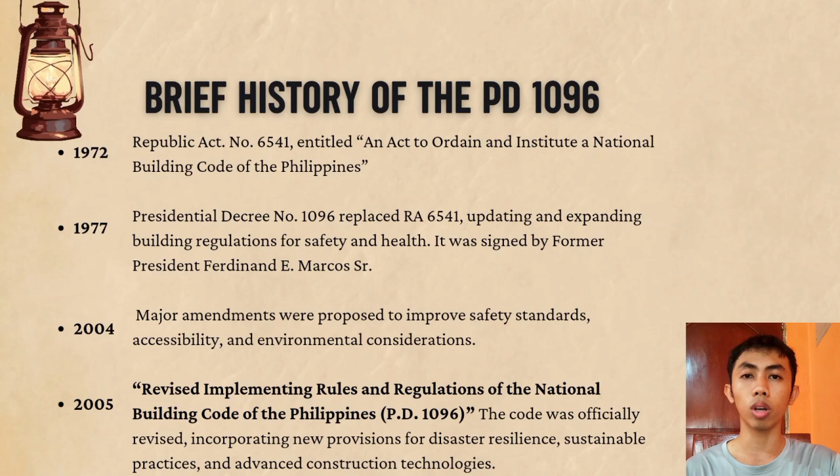Next, Presidential Decree number 1096, adopting a National Building Code of the Philippines, thereby revising Republic Act number 6541. It states that because of the economic development and physical development of the country, we need a building code that is more aligned with modern times.

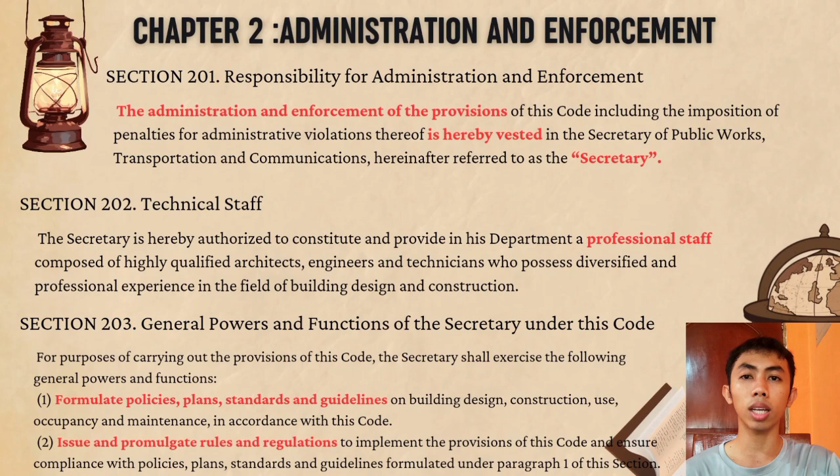Section 203, General powers and functions of the secretary under this code. Una, dapat mag-formulate siya ng policies, plans, standards, at guidelines in accordance with this code. Pangalawa, pagkatapos ma-formulate ang policies and guidelines, dapat mag-issue rin siya ng specific rules and regulations when implementing, para ma-ensure natin ang consistency ng guidelines.

Number 3, trabaho rin ng secretary na evaluate, review, o approve kung may nais baguhin sa code na ito. Nasa kamay niya kung sa tingin niya ay kailangan ng pagbabago o hindi mula sa code na ito. Number 4, siya rin dapat ang nag-seset ng fees tulad ng permit at inspection.

Section 204, professional and technical assistance. Sinasabi dito na ang technical staff na binuo ng secretary ay shall provide different services including professional and technical service, at testing laboratories and facilities.

Section 205, building official. Sila ang in charge ng pag-implement ng rules. Kung walang building official sa lugar, kailangan na ang secretary ang mag-appoint ng current engineer sa mismong municipality na wala pang building official. Ang napiling tao ay mag-i-stay doon sa lugar hanggang may maipalit na building official doon.

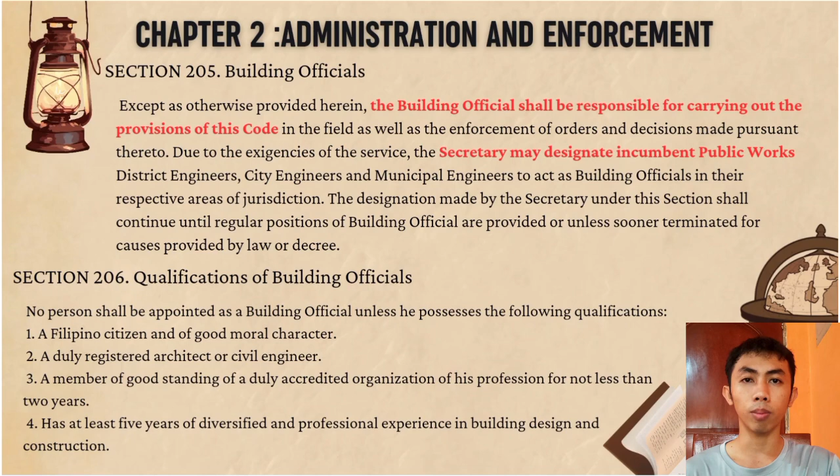Section 206. Sino ba ang maaaring maging building official? Una, dapat Filipino with good moral character, kailangang malinis ang pangalan mo. Pangalawa, dapat registered civil engineer or architect ka, kaya itong mga profession lang pala ang pwedeng maging building official. Pangatlo, dapat member ka ng organized professional organization tulad ng PICE o United Architects of the Philippines for at least 2 years. At lastly, dapat may 5 years experience sa iyong profession.

Section 207. Bilang building official, may mga duties tulad ng pagiging responsable sa enforcement of the code and implementing rules and regulations. Sa kanya rin galing ang mga building permits. Trabaho rin niya na mag-inspect ng existing buildings sa kanilang respective area, at may kapangyarihan din silang magpatigil ng construction kung hindi ito naaayon sa PD 1096.

Section 208. Building officials shall keep a permanent record and accurate account of all fees and other charges. Maaari niyang panatilihin ang 20% para sa kanyang opisina, habang ang 80% ay dapat niyang i-remit sa municipal treasury, na ibibigay naman ng municipal treasurer sa general fund ng either province o ng mismong municipality.

Sabi nga lahat ng bagay may exception. Section 209 ay nagsasaad na ang lahat ng public buildings tulad ng public school at hospital, pati ang traditional indigenous family dwelling, ay exempted sa pagbabayad ng building permit. Ni-specify rin na ang mga indigenous people should be constructed using bamboo, nipa, lumber, at dapat hindi lalampas ng 15,000 pesos ang gastos nila sa pagpapatayo ng bahay na ito.

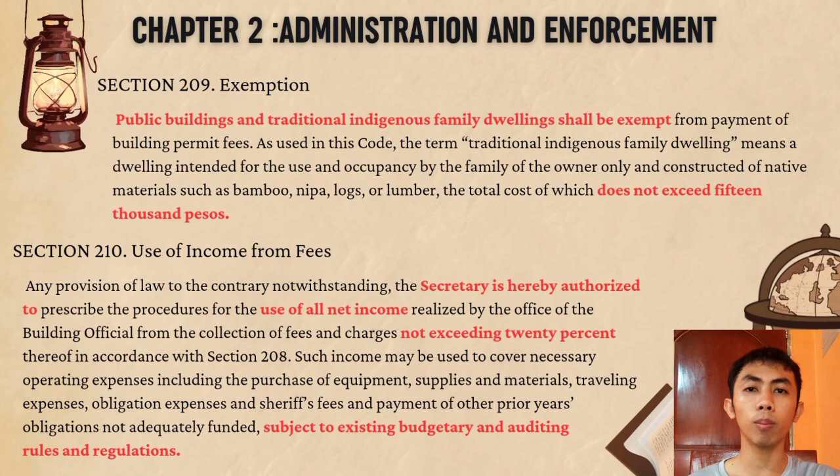Section 210. Ang na-collect na makita from the Office of Building Official ay maaaring kunin ng Secretary ang 20% dito para mapalitan o mabayaran ang mga expenses niya tulad ng operating and travel expenses, facilities and equipment, at others. Ang mga expenses na ito ay dapat comply with budgetary and auditing rules.

Section 211. Gaya ng nasabi kanina, isa sa duties ng Secretary ay mag-formulate at mag-implement ng rules and regulations. Nag-take effect lang daw ito after their publication once a week for 3 consecutive weeks sa newspaper.

Section 212. Kahit na ang secretary ang magde-decide ng bayad kung may nalabag sa rules, hindi dapat tumaas ng 10,000 pesos ang fine dito. Next, Section 213, o penal provision.

So ano ba muna yung pinagkaiba nito sa administrative fines? So when we say administrative fines, tumutukoy ito sa action, process, or responsibility ng isang tao as part of activities or the management. So it does not directly affect the public people. Some of the administrative fines include failure to submit documents on time, or hindi pag-submit ng records or report na hinihingi ni building official. While penal provision is a violation na directly affected ang people or the safety of the buildings.

For example, paggamit ng mga substandard na material, hindi paglalagay ng maayos na sprinkler system and fire exits, o pag-demolish na wala namang mga permit.

Kung nangyari ito, maaaring magbayad ng at most 20,000 yung violators o makulong na hindi higit sa 2 taon, or both - pwede siyang magbayad at makukulong. Then kapag foreign yung nag-violate, pagbabayarin daw siya o ikukulong siya, then after mapagbayaran yun, saka naman siya i-deport.

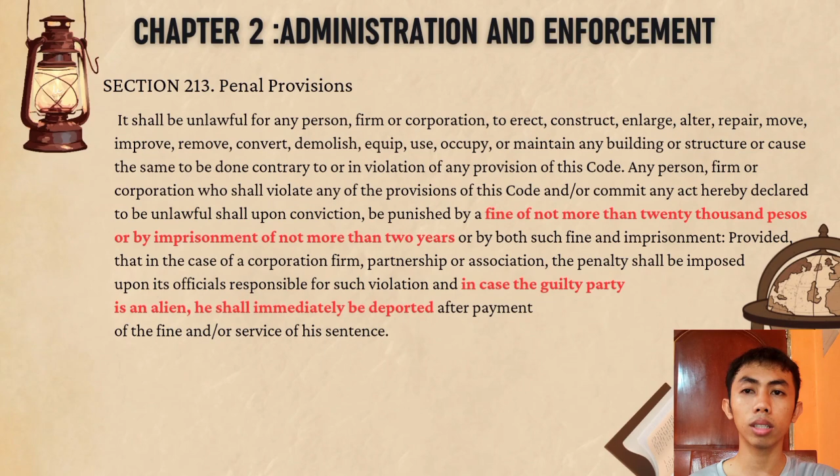Next, Section 214. Dito dinidefine lang kung ano yung mga tinuturing na dangerous building, tulad ng building na di maayos o delikado yung mga ginamit na material, mga building na malapit sa fire hazard, o mga building na nagdudulot ng pollution sa environment, tulad ng factory na mausok o naglalabas ng chemical waste na nakaka-apekto sa health and safety ng public.

Next, Section 215, Abatement of Dangerous Building. Sinasabi dito na kung may dangerous o ruinous building, magbababa ng order yung building official sa lugar, na either ipapa-repair, i-abandon, o ipapa-demolish, depende kung gaano kalala yung sitwasyon ng lugar.

Section 216, Other Remedies. Sinasabi dito na rights and remedies sa PD 1096 is not exclusive sa code na ito, ibig sabihin, coexist ito with other laws. Halimbawa, kapag may nagtayo sa inyo ng building at nalaman mong walang permit o hindi maayos yung pagkagawa, maaaring ikaw mismo ang magsumbong sa otoridad dahil nakataya ang kapakanan ninyo dito. Ibig sabihin, hindi lang siya under ng national code, kundi naapektuhan din dito yung human rights mo.

So dumako naman tayo sa Chapter 3, which is Permits and Inspection. Ano ba nilalaman nito? Una, Section 301, Building Permit. Specific na sinabi dito na no person shall erect, construct, alter, or demolish without obtaining building permit from the building official from that place.

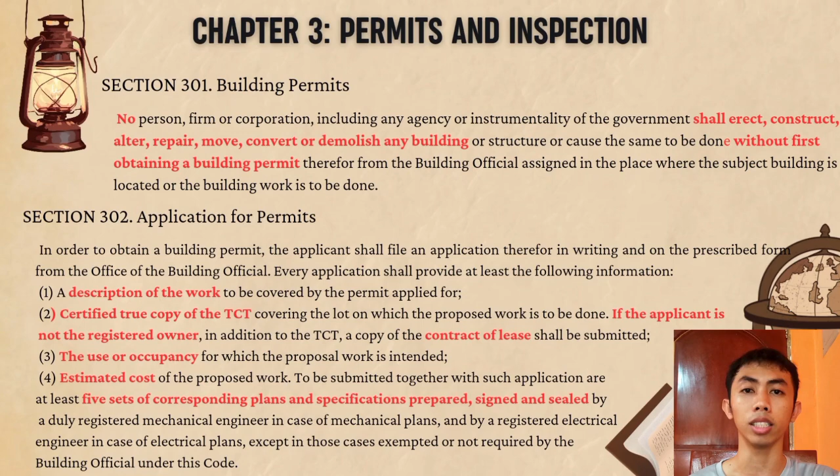Next, Section 303, Processing of Building Permit. Sinasabi dito na pagmamalakad ng building permit is responsibility ni building official. Siya yung nag-inspect kung approved ba yung mga requirements na pinasa mo o kung may error ba doon, kasi kung may error, hindi ka maibibigyan nun - ibig sabihin, bibigyan ka ng pagkakataon na ayusin yon.

Next, Section 304. Once na-satisfy na yung mga requirements at wala namang na-violate na code, maaari na tayong bigyan ng permit. Once na-settled na lahat at nakapagbayad na si permittee, pwede nang ibigay sa kanya yung permit at pwede na siyang mag-construct. Binanggit din dito na kung ano lang yung in-issue doon, dapat yun lang yung gawin.

Kung first floor lang naman yung binigay na plan, so dapat na makita is first floor lang. Hindi ka dapat magdagdag ng iba pang floor kasi violation na kagad yun sa code. Pwede na yun ipatigil kasi wala naman yun sa original mong binigay.

Next, Section 305. Sa section na ito, nakapaloob dito yung limitation and condition once na nakuha natin yung building permit. Sinasabi rito na ang permit does not allow you to violate the code. Yung permit, inaalaw lang tayo para makapagtayo ng bahay, hindi tayo inaalaw para ma-exempt sa batas.

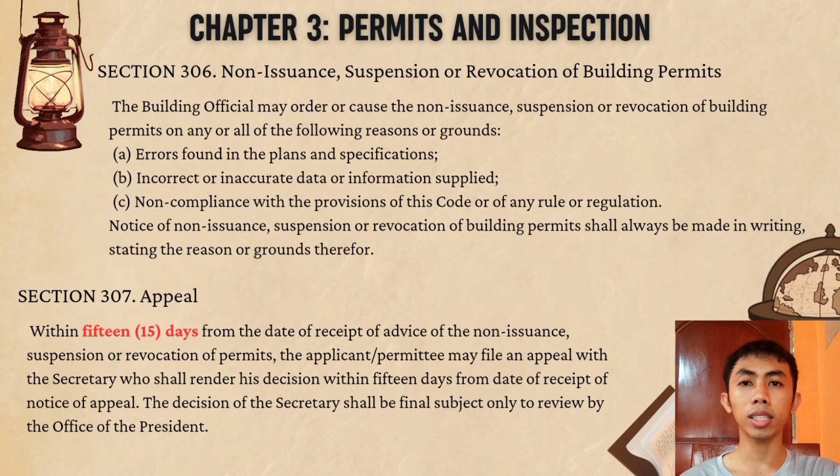Next, Section 307, Appeal. Kung ever na hindi na-approve yung issuance ng permit, si permittee ay pwede mag-appeal within 15 days sa secretary, after may ibigay na notice. Dito, re-reviewin daw ni secretary yon, siya magde-decide kung okay ba o hindi talaga okay yung project na ipapagawa.

Section 308, Inspection and Supervision of Work. Sinasabi dito na dapat may licensed civil engineer o architect na mag-inspect doon sa nasabing building na ipapagawa para malaman kung sumusunod ba sila sa building code. Maaari din kung sino yung engineer o architect na nag-design ng bahay, siya din daw yung mag-inspect dun sa building. At kung ibang professional naman yung kinuha, may karapatan pa rin daw yung engineer o architect na nag-design ng bahay na mag-check and inspect kung naka-align pa rin ba yung design niya at pasok pa rin ba sa safety standard yung project.

Siyempre, may responsibility pa rin naman si engineer na nag-design kasi andun pa rin naman yung pirma niya.

Dapat meron din daw logbook sa construction site, na nakalagay lahat dito yung mga kaganapan doon sa site, tulad ng mga ginawang lab testing, ano ba yung progress na nangyari sa araw na yun, yung weather, at iba pa. After finishing the construction, yung inspector o supervisor ay nire-require na ipasa yung logbook to the building official, at kailangan ding mag-submit ng certificate of completion na nagpapatunay na tapos na yung building at walang na-violate na code habang ginagawa hanggang matapos yung building.

Section 309, Certificate of Occupancy. Sinasabi dito na hanggang wala daw Certificate of Occupancy, hindi daw pwedeng magamit yung building. So after mag-submit ng Certificate of Completion and final inspection of the building, maaari nang mag-issue si building official ng Certificate of Occupancy kung maayos naman daw yung lahat.

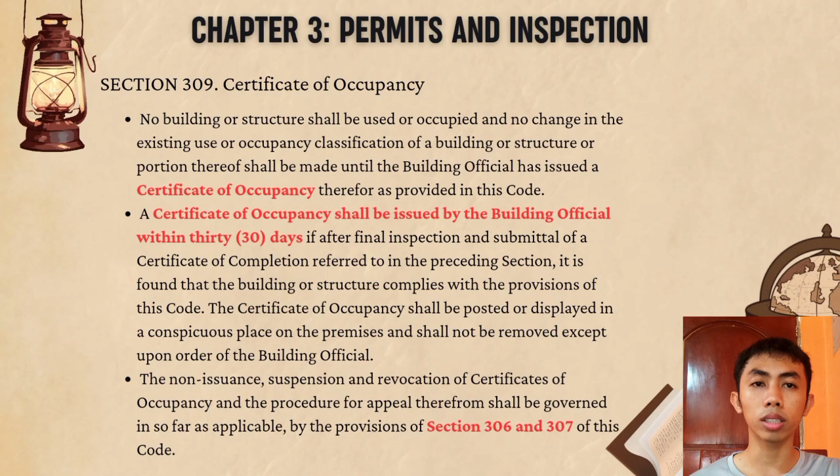Ngayon, dumako naman tayo sa Chapter 4, which is types of construction. So there are types of construction according to Section 401. Type 1, building shall be of wood construction, dapat gawa sa kahoy. Type 2, it is also wood construction with protective fire resistance materials na kayang tumagal ng 1 hour sa sunog.

Kapag gumamit naman daw ng hollow block and semento, pasok naman siya sa Type 3, provided na yung ginagamit na pambubong o support ay gawa pa rin sa kahoy. Type 4, sinasabi rito na yung building material na ginamit ay steel and concrete na, so it should be incombustible o hindi dapat siya nasusunog.

Except the permanent non-bearing partition may use fire retardant wood. Type 5, building shall be fire resistive, so lahat daw dapat ng material ay incombustible na, wala nang dapat kahoy na ginagamit.

Section 402, Changes in Types. So, if the owner wants to change the type of building, he must propose to the building official showing that it is less hazardous than the existing one.

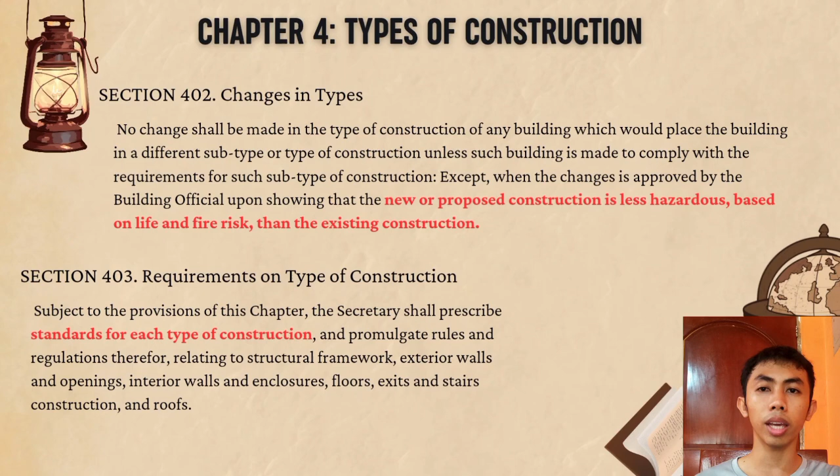Chapter 5, Requirements for Fire Zone. Section 501, Fire Zone Defined. As stated, fire zones are areas within which only certain types of buildings are permitted to be constructed, based on their use or occupancy, type of construction, and resistance to fire.

Section 502, Buildings located in more than one fire zone. If a building is located in more than one fire zone, covering at least 1/3 of the floor area of the building, the building is considered to be in the highly restrictive fire zone, which has stricter standards in terms of fire resistance.

Section 503, Moved Building. Any building or structure moved within or into a fire zone shall be made to comply with all the requirements for buildings in the fire zone. So if we move a building into a fire zone, it must meet the safety standards required in that fire zone.

Section 504. Temporary buildings such as sheds or barracks are allowed to be built within the fire zone with a special permit for a period of time. When the validity of the permit ends, they are required to demolish these temporary buildings.

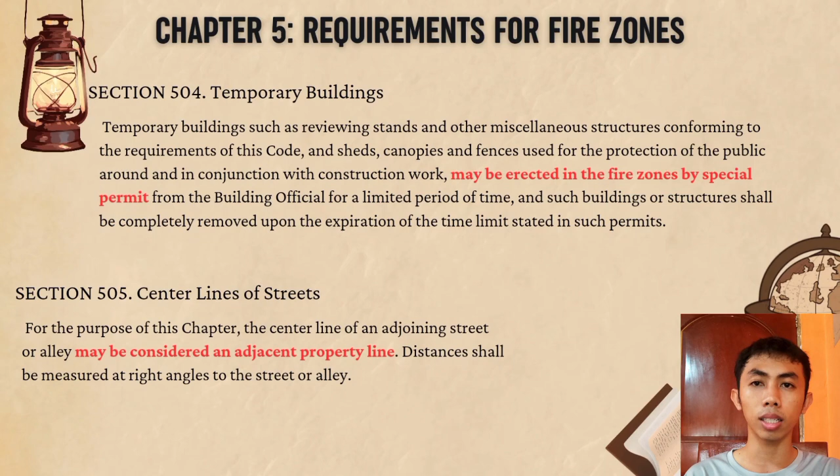Section 505, Center Lines of Streets. The white or yellow line in the middle of the road is called the center line. If the building official says a 6-meter setback is required, the center line can be used as reference. This is often applicable in markets or streets when constructing a new building or infrastructure.

Section 506, Restriction on Existing Buildings. If there are buildings that did not follow the requirements and did not meet the safety standards, they are not allowed to have alterations or changes, except: A, if the building is being demolished, since it is not safe anyway, it is allowed to be demolished.

B, if the case is to move the building to a safer place. C, they are given 1 year to make minor changes, but the costs should not exceed 20% of the value of the building, and they should not add combustible materials like wood that would add more hazard.

D, in case there is an additional building, it must be separated by firewalls from the existing building. E, if there is natural phenomena like an earthquake or typhoon, they are only allowed to repair the building.

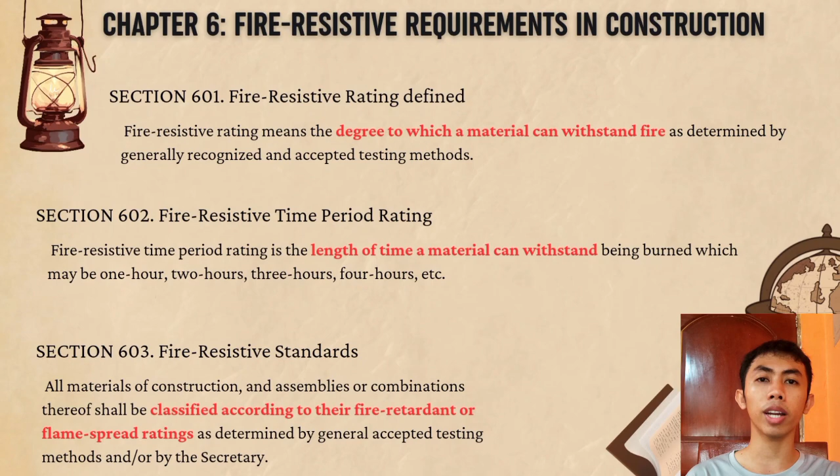Section 603, Fire-Resistive Standards. This states that materials should be classified according to their fire retardant properties - from the word retard, meaning to delay - or their fire spreading characteristics.

Section 604, Fire-Resistive Regulations. Like the other chapters, the secretary is required to promulgate rules and regulations for testing construction materials, from woods, windows, to ceilings, to determine which materials are appropriate to meet the safety standard.

Chapter 7, Classification and General Requirements of All Buildings by Use or Occupancy. Section 701, Occupancy Classified. We have 10 classifications according to Section 701.

First, residential dwelling. It should accommodate no more than 10 people. Group B is when it exceeds 10 residents and has multiple rooms or dwellings, classified as Group B, such as apartments and hotels.

Next, Group C includes schools and recreation, such as libraries or gyms, where we work out. Then Group D is institutional.

It is divided into 3. First, Division 1 includes mental hospitals, jails, rehab, or any building where people are restrained or confined. In Division 2 are nurseries for babies and hospitals that can accommodate more than 5 people. In Division 3, it's mostly the same.

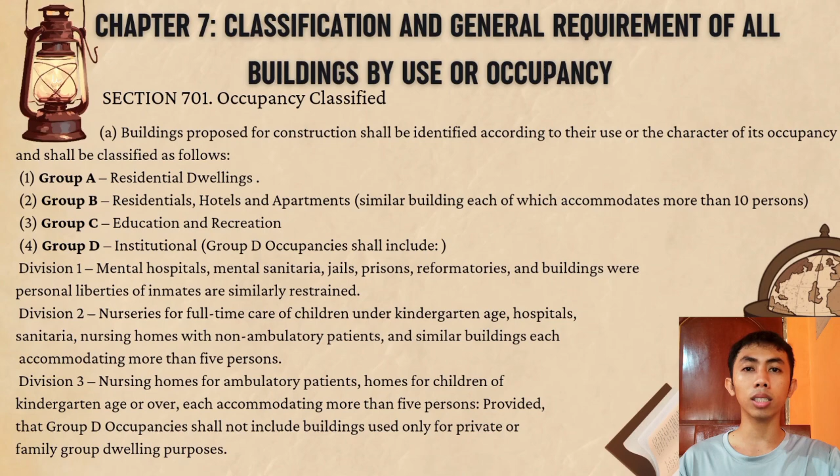Next is Group E, Business and Mercantile. Like Group D, this is divided into three. First, including gasoline stations, car dealers, and storage garages that don't use open flames and welding in the area. Division 2 includes retail shops, small restaurants, and police and fire stations.

Division 3 is particular to large parking spaces or garages, like hangars or garages for aircrafts. Next, Group F or Industrial, which includes different kinds of plants. Group G is storage and hazardous.

This has 5 divisions. The first division is storage for highly flammable materials like gasoline. Division 2 includes storage for dry cleaning plants and paint, which is also flammable. Division 3 is woodworking and factories.

This includes those who cut wood, make wood sculptures, and sell coco lumber, and any factory that produces wood dust that is prone to fire. Division 4 is repair garage, like auto shops. And lastly, Division 5, which is specific to aircraft repair hangars.

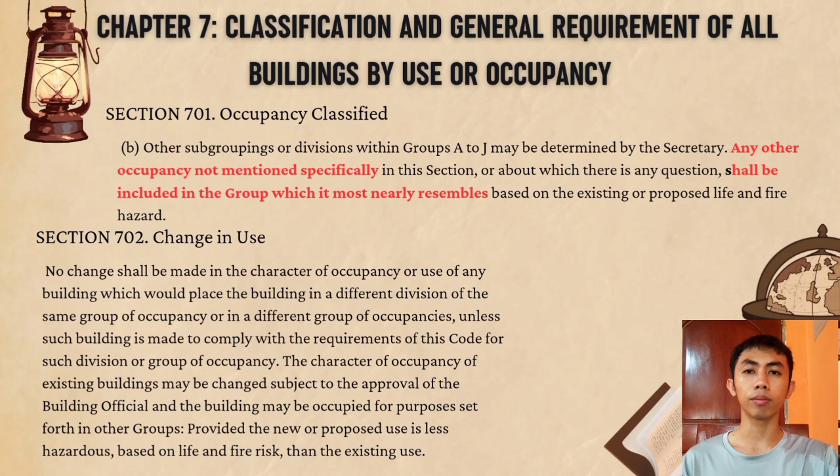If this is the case, it is approved as long as each type of building meets the requirements of safety standards.

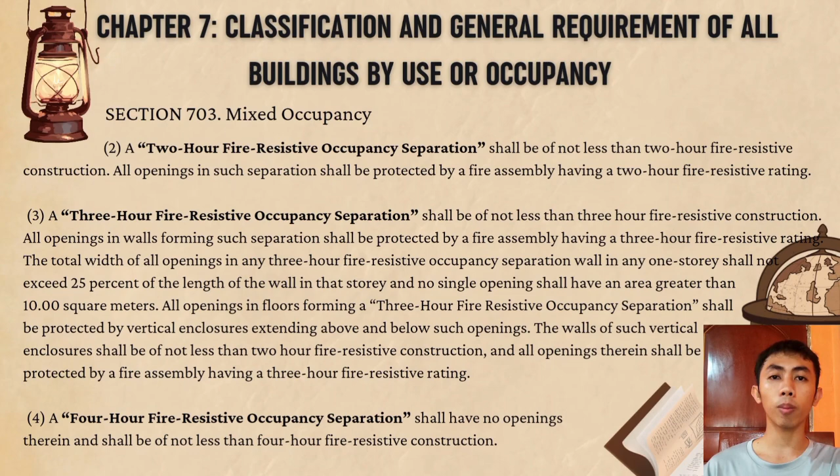3-hour fire resistive occupancy separation. Naka-indicate dito na dapat yung opening is not greater than 25% of the length of the wall, and hindi daw lalaki ng 10 square meters yung openings. Pagdating naman sa 4-hour fire resistive occupancy, sinasabi daw dito na dapat yung building ay walang opening, and kaya niya daw mag-resist ng 4 hours resistive construction.

Section 704, location of the property. Sinasabi rito na if there are more than one building in the same property, ang una nating assumption ay separated sila. Pero kapag yung combined floor area ng dalawang building is within a limit, kino-consider natin siya na isa lang, provided na ina-ensure nito yung safety ng lugar.

Section 705, allowable floor areas. Sinasabi dito na ang allowable floor area ng isang building ay nakadepende sa type ng building, at ang magko-proclaim nito ay ang secretary ulit ng DPWH. Sinasabi rin dito na para sa separate buildings within a property, magkahiwalay dapat ang pagsukat ng floor area.

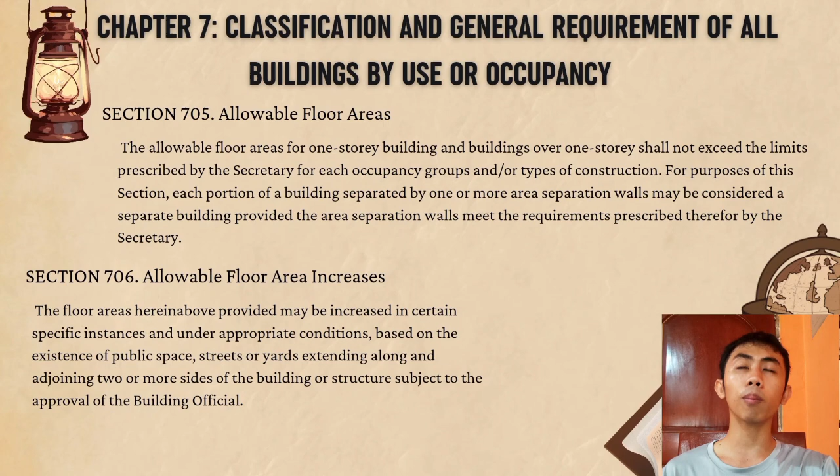Section 706, allowable floor area increase. Binanggit rito na sa mga specific instances, inaallow daw na ipa-extend yung building, provided na inapprove siya ng building official.

Section 707, maximum height of building. Ang maximum height ng building from floor to ceiling ay dapat hindi lalagpas ng 3 meters para sa building na for dwelling, yung mga tinitirhan ng mga tao. Para naman sa mga building na hindi tinitirhan ng mga tao, pwede daw ito hanggang 6 meters, like tower.

Section 708, minimum requirements for Group A dwelling. A, dwelling location and lot occupancy. Sinasabi dito na kung yung building mo ay located sa corner ng street, pwede mo i-occupy ang 90% mismo ng lote. And kung nasa gitna naman or napapalibutan siya ng ibang property, pwede mo i-occupy ang 80% ng lote mismo, provided na mayroong 2-meter setback from the property line.

B, light and ventilation. Dito may discuss mamaya sa Chapter 8 which is light and ventilation. Sanitation - sinasabi dito na dapat mayroon daw at least one toilet, and also washing and drainage facilities.

Foundation. Sinasabi dito na dapat yung pundasyon ng building ay at least 250 mm thick and dapat below 600 mm from the ground.

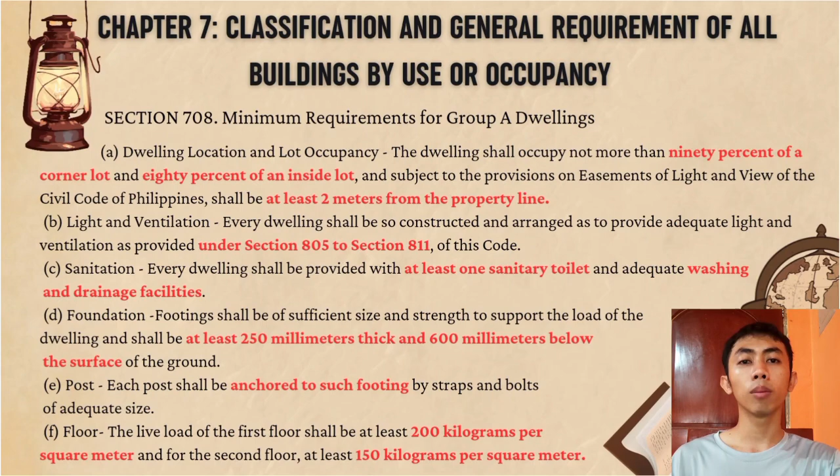Roof. Para naman sa roof, dapat daw kaya niyang i-withstand ang wind load na 120 kg per square meter. Stairs - stairs shall be at least 750 mm in width, 200 mm in rise o yung taas, and a minimum run of 200 mm din.

I, entrance and exit. There shall be at least one entrance and another one for exit. J, electrical requirements - all electrical installations shall conform to the requirements of the Philippine Electrical Code. K, mechanical requirements - same lang din, dapat naka-align siya sa Philippine Mechanical Engineering Code.

Section 709, requirements for other groups occupancies. Sinasabi lang naman dito na ang rules and regulations of minimum requirements of other occupancies aside from dwellings ay manggagaling mismo sa Secretary ng DPWH.

Chapter 8, Light and Ventilation. Section 801, General Requirements of Light and Ventilation - subject to the provisions of the Civil Code of the Philippines on easements of light and view, and to the provisions of this part of the code. Every building shall be designed, constructed, and equipped to provide adequate light and ventilation. All buildings shall face a street or public alley or a private street which has been duly approved.

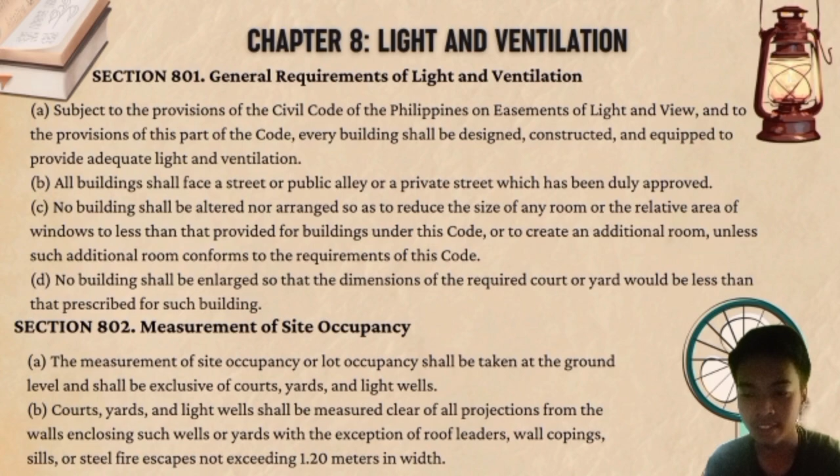Section 802. Measurement of site occupancy. The measurement of site occupancy or lot occupancy shall be taken at the ground level and shall be exclusive of courts, yards, and light wells. Courts, yards, and light wells shall be measured clear of all projections from the walls enclosing such wells or yards, with the exception of roof leaders, wall coping, sills, or steel fire escapes not exceeding 1.2 meters in width.

Section 803. Percentage of site occupancy. Maximum site occupancy shall be governed by the use, type of construction, and height of the building, and the use, area, nature, and location of the site, and subject to the provisions of the local zoning requirements and in accordance with the rules and regulations promulgated by the Secretary.

Section 804. Size and dimensions of courts. Minimum size of courts and their least dimensions shall be governed by the use, type of construction, and height of the building, as provided in the rules and regulations promulgated by the Secretary, provided that the minimum horizontal dimension of a court shall be not less than 2 meters. All inner courts shall be connected to a street or yard, either by a passageway with a minimum width of 1.2 meters or by a door through a room or rooms.

Section 805. Ceiling heights. Habitable rooms provided with artificial ventilation shall have a ceiling height not less than 2.4 meters, measured from the floor to the ceiling, provided that for buildings of more than one story, the minimum ceiling height for the first story shall be 2.7 meters and for the second story 2.4 meters. Succeeding stories shall have an unobstructed typical headroom clearance of not less than 2.1 meters above the finished floor.

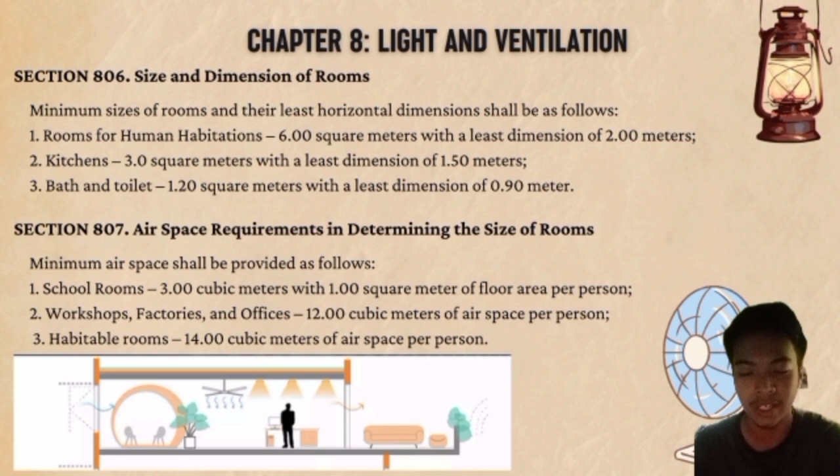Section 808. Window openings. Every room intended for any use not provided with an artificial ventilation system as specified in this code shall be provided with a window or windows with a total free area of openings equal to at least 10% of the floor area of the room, and such window shall open directly to a court, yard, public street or alley, or open watercourse.

Section 809. Vent shafts. Ventilation or vent shafts shall have a horizontal cross-sectional area of not less than 0.1 square meter for every meter of height of shaft, but in no case shall the area be less than 1 square meter. No vent shaft shall have its least dimension less than 600 millimeters. Unless open to the outer air at the top of its full area, the vent shaft shall be covered by a skylight having a net free area of fixed louver openings equal to the maximum required shaft area.

Air ducts shall open to a street or court by a horizontal duct or intake at a point below the lowest window opening. Such duct or intake shall have a minimum unobstructed cross-sectional area of not less than 0.3 square meter with a minimum dimension of 300 millimeters. The openings to the duct or intake shall not be less than 300 millimeters above the bottom of the shaft and the street surface or level of the court at the respective ends of the duct or intake.

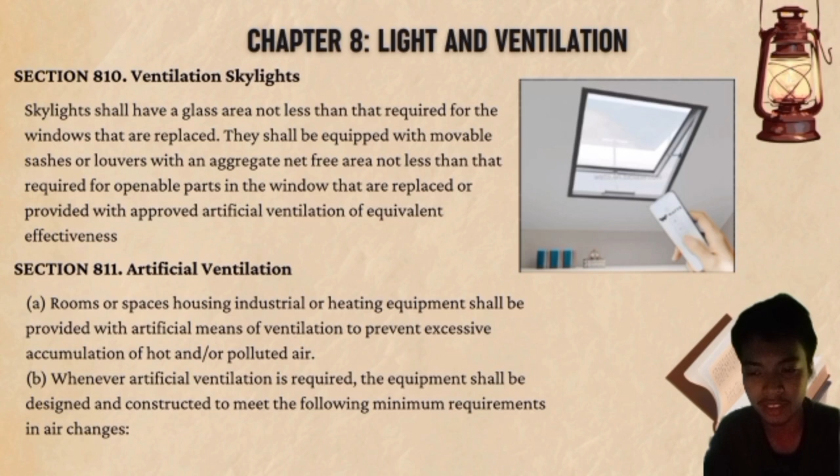Whenever artificial ventilation is required, the equipment shall be designed and constructed to meet minimum requirements in air changes. For rooms entirely above grade used for office, clerical, or administrative purposes, or as stores, sales rooms, restaurants, markets, factories, workshops, or machinery rooms, not less than 3 changes of air per hour shall be provided.

For rooms entirely above grade and used as bakeries, hotel or restaurant kitchens, laundries other than accessories to dwellings, and boiler rooms, not less than 10 changes of air per hour shall be provided.

For auditoriums and other rooms used for assembly purposes with seats or other accommodations, not less than 0.3 cubic meter of air per minute shall be supplied for each person.

For wards and dormitories of institutional buildings, not less than 0.45 cubic meter of air per minute shall be supplied for each person accommodated. For other rooms or spaces not specifically covered under this section, applicable provisions of the Philippine Mechanical Engineering Code shall be followed.

Chapter 9, Sanitation. Section 901, General Requirements. Subject to the provisions of Book 2 of the Civil Code of the Philippines on property, ownership, and its modification, all buildings hereafter erected, altered, remodeled, relocated, or repaired for human habitation shall

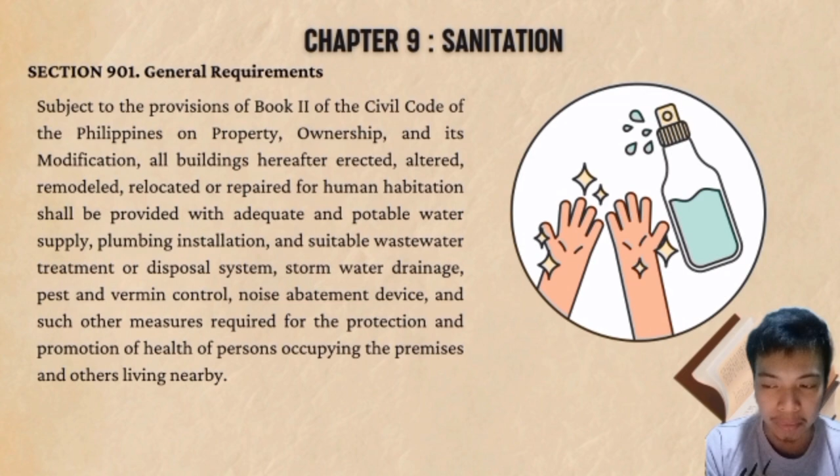be provided with adequate and potable water supply, plumbing installation, and suitable wastewater treatment or disposal system, stormwater drainage, pest and vermin control, noise abatement devices, and such other measures required for the protection and promotion of health of persons occupying the premises and others living nearby.

Section 902, Water Supply System. Whenever available, the potable water requirements for a building used for human habitation shall be supplied from existing municipal or city waterworks system. The quality of drinking water from meteoric, surface, or underground sources shall conform to the criteria set in the latest approved national standards for drinking water.

The design, construction, and operation of deep wells for abstraction of groundwater shall be subject to the provisions of the Water Code of the Philippines. The design, construction, and operation of independent waterworks systems, private housing subdivisions, or industrial estates shall be governed by existing laws relating to local waterworks systems.

Lastly, the water piping installations inside the buildings and premises shall conform to the provisions of the National Plumbing Code of the Philippines. Section 903, Wastewater Disposal System.

Sanitary sewage from buildings and neutralized or pre-treated industrial wastewater shall be discharged directly into the nearest street sanitary sewer main of existing municipal or city sanitary sewerage system, in accordance with the criteria set by the Code on Sanitation and the National Pollution Control Commission.

All buildings located in areas where there are no available sanitary sewerage systems shall dispose their sewage via Imhoff or septic tank and subsurface absorption field. Lastly, sanitary and industrial plumbing installations inside buildings and premises shall conform to the provisions of the National Plumbing Code.

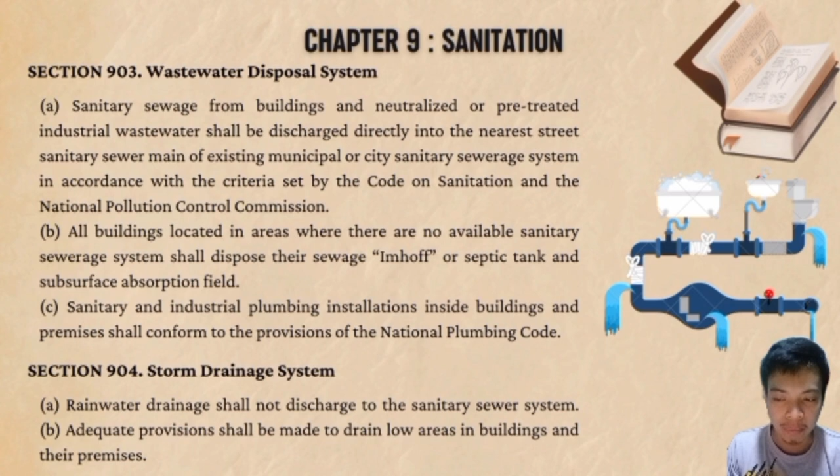Section 904, Storm Drainage System. Rainwater drainage shall not discharge to the sanitary sewer system. Adequate provision shall be made to drain low areas in buildings and their premises.

Section 905, Pest and Vermin Control. All buildings with hollow and/or wood construction shall be provided with rat-proofing. Garbage bins and receptacles shall be provided with ready means for cleaning and with positive protection against entry of pests and vermin. Dining rooms for public use without artificial ventilation shall be properly screened.

Section 906, Noise Pollution Control. Industrial establishments shall be provided with positive noise abatement devices to tone down the noise level of equipment and machineries to acceptable limits set down by the Department of Labor and the National Pollution Control Commission.

Section 907, Pipe Materials. All pipe materials to be used in buildings shall conform to the standard specifications of the Philippine Standard Council. Chapter 10.

Building Projection over Public Streets. Section 1001, General Requirements. No part of any building or structure or any of its appendages shall project beyond the property line of the building site, except as provided in this code. The projection of any structure or appendage over a public property shall be the distance measured horizontally from the property line to the uttermost point of the projection.

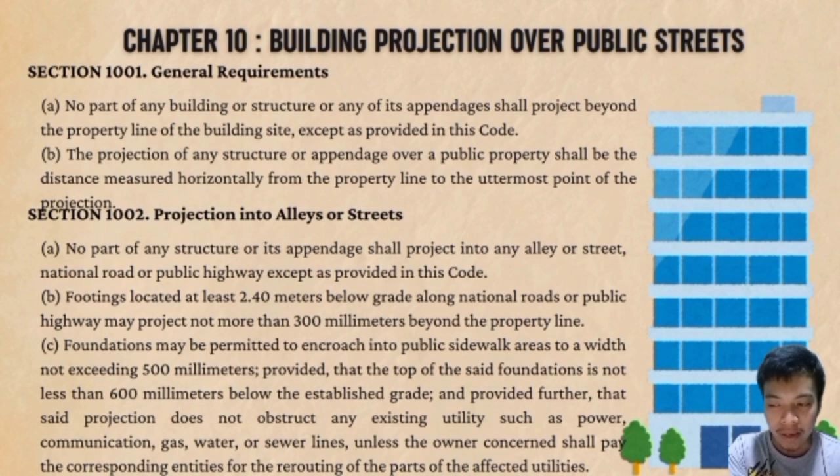Footings located at least 2.4 meters below grade along national roads or public highways may project not more than 300 millimeters beyond the property line. Foundations may be permitted to encroach into public sidewalk areas to a width not exceeding 500 millimeters, provided that the top of the said foundation is not less than 600 millimeters below the established grade, and provided further that the projection does not obstruct any existing utility such as power, communication, gas, water, or sewer lines, unless the owner concerned shall pay the corresponding entities for the rerouting of the affected utilities.

Section 1003. Projection of balconies and appendages over streets. The extent of any projection over an alley or street shall be uniform within a block and shall conform to the limitations set forth. The clearance between the established grade of the street and/or sidewalk and the lowest undersurface of any part of the balcony shall not be less than 3 meters.

Section 1004. Arcades. Whenever required by existing buildings and zoning regulations, arcades shall be constructed on sidewalks of streets. The width of the arcade and its height shall be uniform throughout the street, provided that in no case shall an arcade be less than 3 meters above the established sidewalk grade.

Section 1005. Canopies or marquees. Definition: a canopy or marquee is a permanent roofed structure above a door, attached to and supported by the building and projecting over a wall or sidewalk. This includes any object or decoration attached thereto.

Projection and clearance. The horizontal clearance between the outermost edge of the marquee and the curb line shall not be less than 300 millimeters. The vertical clearance between the pavement or ground line and the undersurface of any part of the marquee shall not be less than 3 meters.

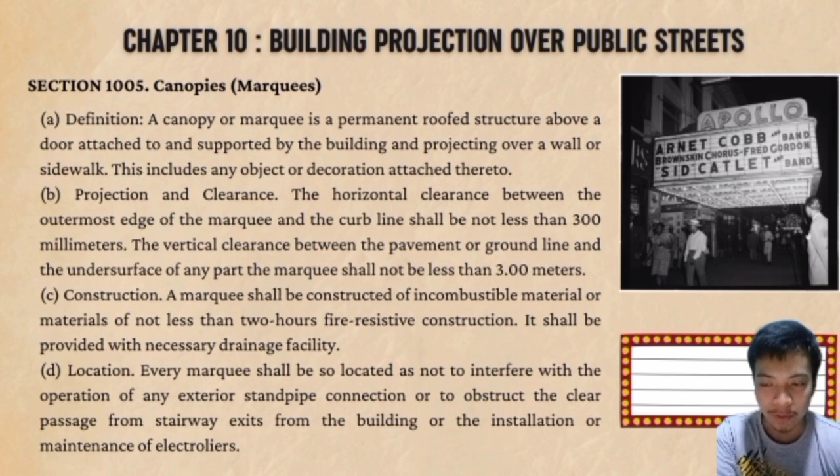Construction. A marquee shall be constructed of incombustible material or materials of not less than 2 hours fire-resistive construction. It shall be provided with necessary drainage facility. Lastly, location. Every marquee shall be so located as not to interfere with the operation of any exterior standpipe connection or to obstruct the clear passage from stairway exits from the building, or the installation or maintenance of electroliers.

Section 1006. Movable awnings or hoods. An awning is a movable shelter supported entirely from an exterior wall of a building and of a type which can be retracted, folded, or collapsed against the face of a supporting building.

The horizontal clearance between the awning and the curb line shall not be less than 300 millimeters. The vertical clearance between the undermost surface of the awning and the pavement or ground line shall not be less than 2.4 meters. Collapsible awnings shall be so designed that they shall not block a required exit when collapsed or folded.

Section 1007. Doors, windows, and the like. Doors, windows, and the like less than 2.4 meters above the pavement or ground line shall not, when fully opened or upon opening, project beyond the property line, except fire exit doors.

Section 1008. Corner buildings with chaflans. Every corner building or solid fence on a public street or alley less than 3.6 meters in width shall be truncated at the corner. The face of the triangle so formed shall be at right angles to the bisector of the angle of the intersection of the street lines, provided that in no case, the Secretary shall determine the size and form of the chaflan.

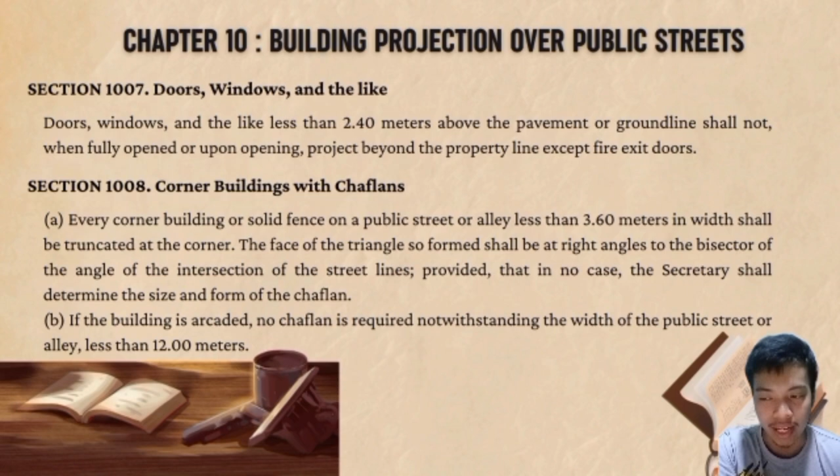If the building is arcaded, no chaflan is required, notwithstanding the width of the public street or alley being less than 12 meters. Chapter 11. Protection of pedestrians during construction or demolition.

Section 1101. General requirements. No person shall use or occupy a street, alley, or public sidewalk for the performance of work covered by a building permit except in accordance with the provisions of this chapter. No person shall perform any work on any building or structure adjacent to a public way in general use for pedestrian travel unless the pedestrians are protected as specified in this chapter.

Any material or structure temporarily occupying public property, including fence, canopies, and walkways, shall be adequately lighted between sunset and sunrise. Section 1102. Storage in public property.

Materials and equipment necessary for work to be done under a permit, when placed or stored on public property, shall not obstruct free and convenient approach to and use of any fire hydrant, fire or police alarm box, utility box, catch basin, or manhole, and shall not interfere with any drainage of any street or alley gutter.

Section 1103. Mixing mortar on public property. The mixing of mortar, concrete, or similar materials on public streets shall not be allowed.

Section 1104. Protection of utilities. All public or private utilities above or below the ground shall be protected from any damage by any work being done under the permit. The protection shall be maintained while such work is being done and shall not obstruct the normal functioning of any such utility. Section 1105. Walkway.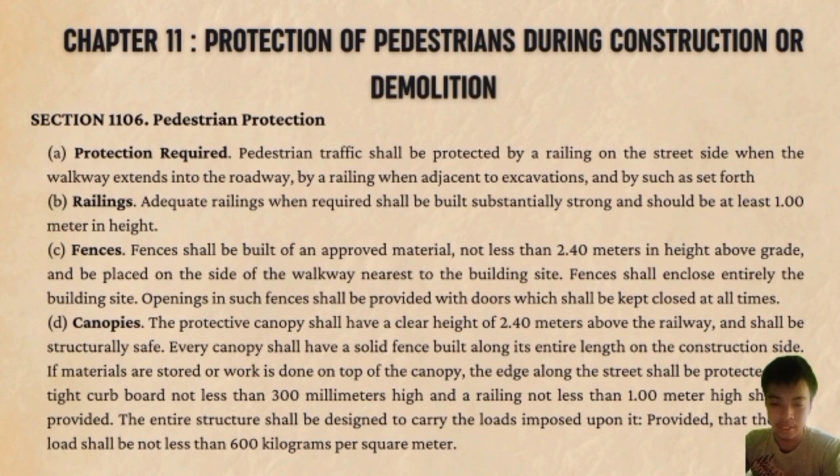Canopies. The protective canopy shall have a clear height of 2.4 meters above the walkway and shall be structurally safe. Every canopy shall have a solid fence built along its entire length on the construction side. If materials are stored or work is done on top of the canopy, the edge along the street shall be protected by a tight curb board not less than 300 millimeters in height and a railing not less than 1 meter in height shall be provided. The entire structure shall be designed to carry the loads imposed upon it, provided that the live load shall not be less than 600 kilograms per square meter.

Section 1107, Maintenance and Removal of Protective Devices. Maintenance. All protective devices shall be properly maintained in place and kept in good order for the entire length of time pedestrians may be endangered. Removal. Every protective fence or canopy shall be removed within 30 days after such protection is no longer required as determined by the building official.

Section 1108, Demolition. The work of demolishing any building shall not be commenced until all the necessary pedestrian protective structures are in place. The building official may require the permittee to submit plans, specifications, and complete schedule of demolition. When so required, no work shall be done until such plans, specifications, and schedule are approved by the building official.

Chapter 12, General Design and Construction Requirements. Section 1201, General Requirements. Buildings proposed for construction shall comply with all the regulations and specifications herein set forth governing quality, characteristics and properties of materials, methods of design and construction, type of occupancy and classification.

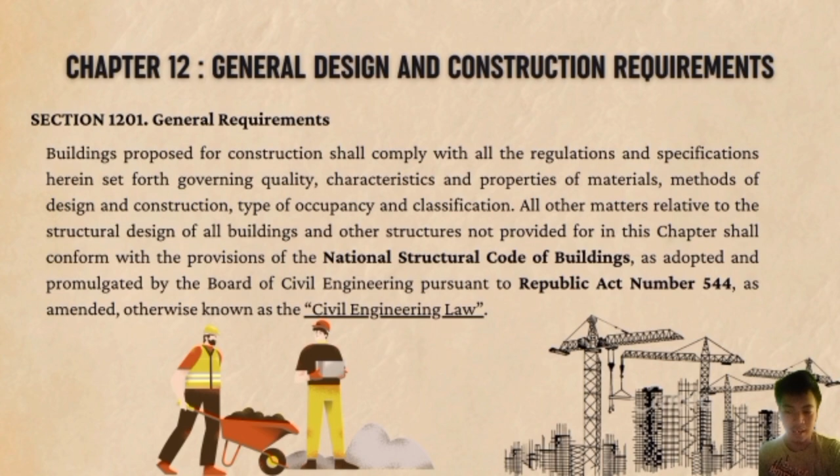All other matters relative to the structural design of all buildings and other structures not provided for in this chapter shall conform with the provisions of the National Structural Code of Buildings, as adopted and promulgated by the Board of Civil Engineering pursuant to Republic Act No. 544 as amended, otherwise known as the Civil Engineering Law.

Section 1202, Excavation, Foundation, and Retaining Walls. Subject to the provisions of Articles 684 to 686 of the Civil Code of the Philippines on lateral and subjacent support, the design and quality of materials used structurally in excavation, footings, and foundation shall conform to accepted engineering practice. Excavation and fills for buildings or structures shall be so constructed or protected that they do not endanger life or property.

Whenever the depth of excavation for any construction is such that the lateral and subjacent support of the adjoining property or existing structure thereon would be affected in a manner that the stability or safety of the same is endangered, the person undertaking or causing the excavation to be undertaken shall be responsible for the expense of underpinning or extending the foundation or footings of the aforementioned property or structure.

Excavation and other similar disturbances made on public property shall, unless otherwise excused by the building official, be restored immediately to its former condition within 48 hours from the start of such excavation and disturbances by whoever caused such excavation or disturbance. Footings, foundations, and retaining walls.

Footings and foundations shall be of appropriate type and of adequate size and capacity in order to safely sustain the superimposed loads under seismic or any condition or external forces that may affect the safety or stability of the structure. It shall be the responsibility of the architect and/or engineer to adopt the type and design of the same in accordance with the standards set forth by the Secretary.

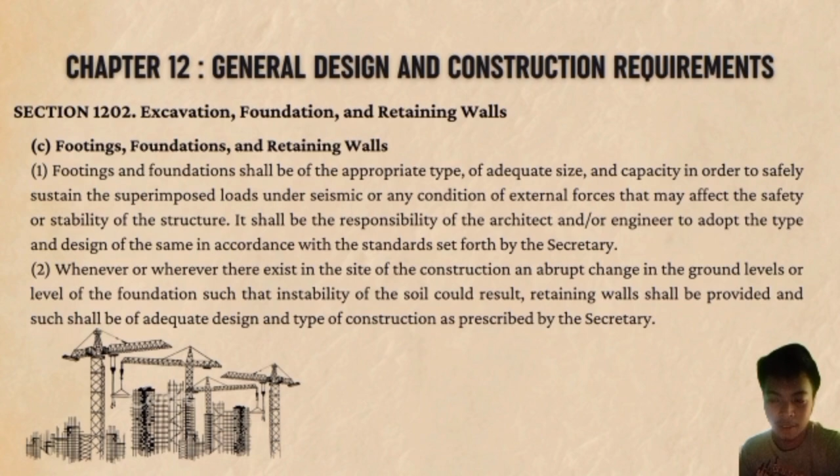Whenever or wherever there exists in the site of construction an abrupt change in ground levels or level of the foundation, such that instability of the soil could result, retaining walls shall be provided, and such shall be of adequate design and type of construction as prescribed by the Secretary.

Section 1203, Veneer. Veneer is a non-structural facing of brick, concrete, tile, metal, plastic, glass, or other similar approved materials attached to a backing or structural components of the building for the purpose of ornamentation, protection, or enclosure, that may be adhered, integrated, or anchored either on the interior or exterior of the building or structure.

Design requirements. The design of all veneer should comply with the following: veneer should support no load other than its own weight and the vertical dead load of veneer immediately above. Surfaces to which veneer is attached shall be designed to support the additional vertical and lateral loads imposed by the veneer, with consideration given to differential movements of the support, including those caused by temperature changes, shrinkage, creep, and deflection.

Adhered veneer and its backing should be designed to have bond to the supporting elements sufficient to withstand shearing stress due to their weights, including seismic effect on the total assemblage. Anchored veneer and its attachment shall be designed to resist horizontal forces equal to twice the weight of the veneer. Anchors, supports, and ties shall be non-combustible and corrosion resistant.

Section 1204, Enclosure of Vertical Openings. Vertical openings shall be enclosed depending upon the fire-resistive requirements of a particular type of construction as set forth in this code. Elevator enclosures: walls and partitions enclosing elevators and escalators shall be of not less than the fire-resistive construction required under the types of construction.

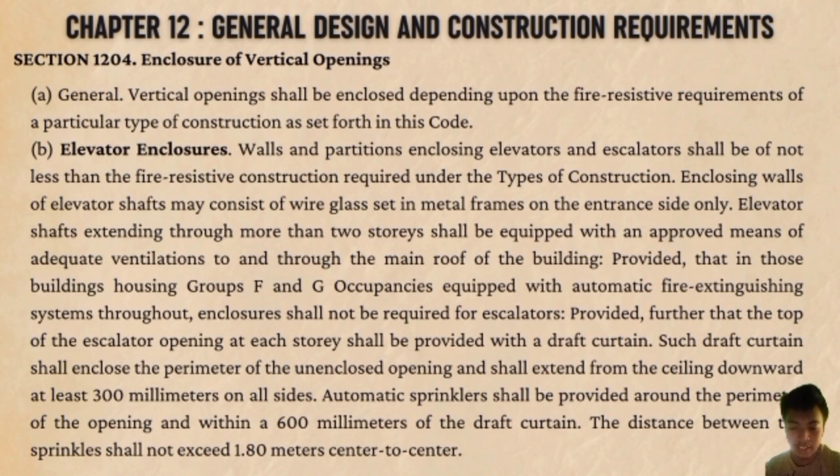Section 1205, Floor Construction. Other vertical openings: all shafts, ducts, chutes, and other vertical openings not covered in the paragraph above shall have enclosing walls conforming to the requirements specified under the type of construction of the building in which they are located.

Ducts or air ducts passing through a floor shall be enclosed in a shaft, as required in this code for vertical openings. For floor construction, all floors should be of such materials and construction as specified under Chapter 5, Fire Zones and Fire Resistive Standards, and under Chapter 6, Types of Construction.

All floors shall be so framed and secured into the framework and supporting walls as to form an integral part of the whole building. The types of floor construction used shall provide means to keep the beam and girder from lateral buckling. Section 1206, Roof Construction and Covering.

Roof covering for all buildings shall be either fire retardant or ordinary, depending upon the fire resistive requirements of the particular type of construction. For roof trusses, all roofs shall be so framed and tied into the framework and supporting walls so as to form an integral part of the whole building.

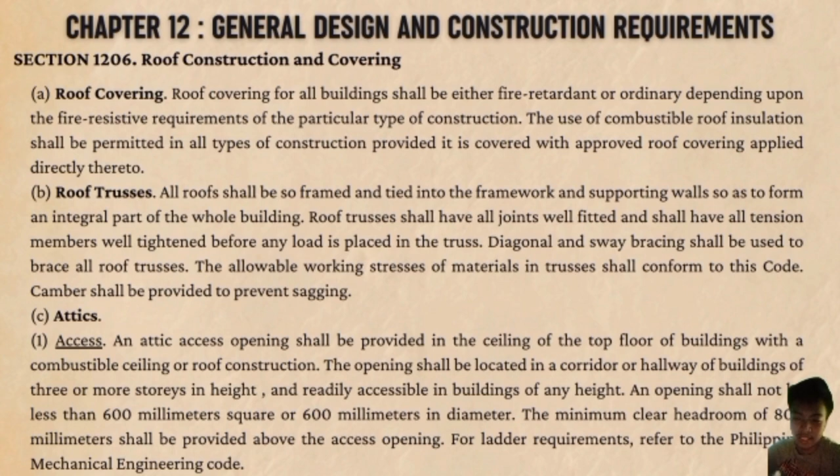Attic access: an attic access opening shall be provided in the ceiling of the top floor of buildings with a combustible ceiling or roof construction. The opening shall be located in a corridor or hallway of the building of 3 or more stories in height, and readily accessible in buildings of any height.

Area separation. Enclosed attic spaces of combustible construction shall be divided into horizontal areas not exceeding 250 square meters by fire-resistive partitions extending from the ceiling to the roof, except that where the entire attic is equipped with an approved automatic fire extinguishing system, the attic space may be divided into areas not exceeding 750 square meters.

Draft stops, regardless of the type of construction, shall be installed in truss roofs between the roof and bottom chords of trusses. In all buildings exceeding 2,000 square meters, draft stops shall be constructed as for attic area separations and ventilation.

Enclosed attics, including rafter spaces formed where ceilings are applied direct to the underside of roof rafters, shall be provided with adequate ventilation protected against the entrance of rain. Roof drainage system.

Roof drains shall be installed at low points of the roof and shall be adequate in size to discharge all tributary waters. Overflow drains and scuppers: where roof drains are required, adequate overflow drains shall be provided. Concealed piping, roof drains, and overflow drains, when concealed within the construction of the building, shall be installed in accordance with the provisions of the National Plumbing Code.

Over public property: roof drainage water from a building shall not be permitted to flow over public property, except for Group A and J occupancies. And lastly, flashing: flashing and counter-flashing shall be provided at the juncture of the roof and vertical surfaces.

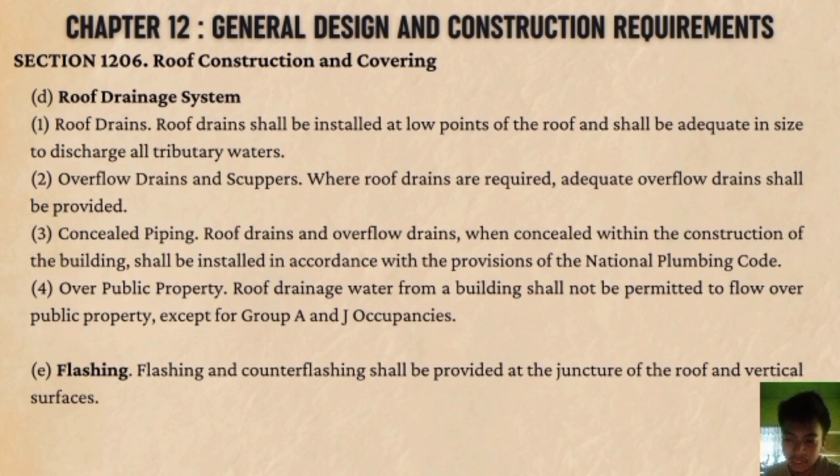Section 1207, Stairs, Exits, and Occupant Loads. The construction of stairs and exits shall conform to the occupant load requirements of the buildings, reviewing stands, bleachers, and grandstands. Determination of occupant loads: the occupant load permitted in any building or portion thereof shall be determined by dividing the floor area assigned to that use by the unit area allowed per occupant as determined by the Secretary.

Exit requirements of any building or portion thereof used for different purposes shall be determined by the occupant load which gives the largest number of persons.

Posting of room capacity: any room having an occupant load of more than 50, where fixed seats are not installed and which is used for classroom, assembly, or similar purpose, shall have the capacity of the room posted in a conspicuous place near the main exit from the room.

Lastly, changes in elevation. Except in Group A occupancies, changes in floor elevations of less than 300 mm along any exit serving a tributary occupant load of 10 or more shall be by means of a ramp.

Exits. Number of exits: every building or usable portion thereof shall have at least one exit. In all occupancies, a floor above the first story having an occupant load of more than 10 shall not have less than 2 exits. Width: the total width of exit in meters shall not be less than the total occupant load served divided by 165. Such width of exits shall be divided approximately equally among the separate exits.

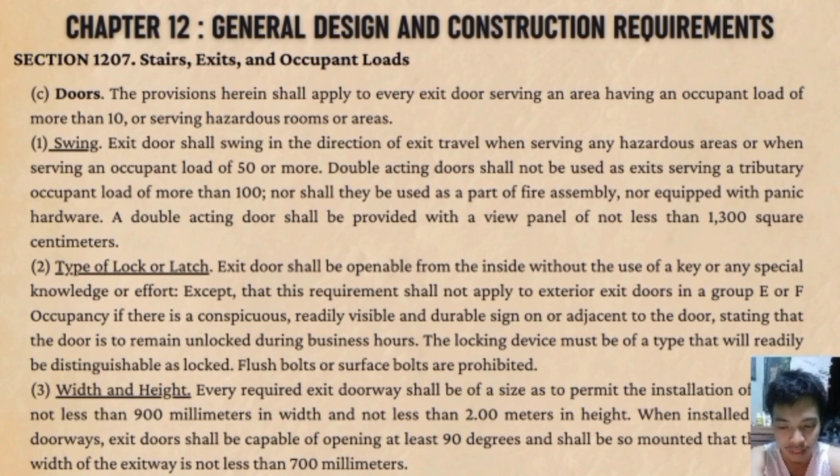Width and height: every required exit doorway shall be of a size to permit the installation of a door not less than 900 mm in width and not less than 2 meters in height when installed in exit doorways. Exit doors shall be capable of opening at least 90 degrees and shall be so mounted that the clear width of the exitway is not less than 700 mm.

Door leaf width: no leaf of an exit door shall exceed 1.2 meters in width. Special doors: revolving, sliding, and overhead doors shall not be used as required exits.

Egress from door: every required exit door shall give immediate access to an approved means of egress from the building. Change in floor level at doors: regardless of the occupant load, there shall be a floor or landing on each side of an exit door.

Door identification: glass doors shall conform to the requirements in Section 1805. Other exit doors shall be so marked that they are readily distinguishable from the adjacent construction. Additional doors: when additional doors are provided for egress purposes, they shall conform to all provisions in the following cases.

Approved revolving doors having leaves which will collapse under opposing pressures may be used in exit situations, provided that such doors have a minimum width of 2 meters, or they are not in use in occupancies where exits are required to be equipped with panic hardware, or at least one conforming exit door is located adjacent to each revolving door installed in a building, and the revolving door shall not be considered to provide any exit width.

Corridors and exterior exit balconies. The provisions herein shall apply to every corridor and exterior exit balcony serving as a required exit for an occupant load of more than 10.

Width. Every corridor or exit balcony shall not be less than 1.1 meters in width. The required width of corridors and exterior exit balconies shall be unobstructed, except that trim, handrails, and doors, where fully opened, shall not reduce the required width by more than 200 millimeters.

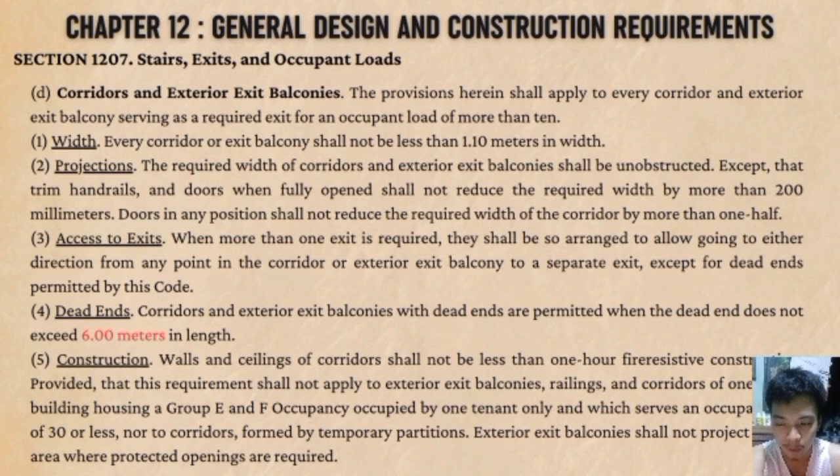Openings. Where corridor walls are required to be of 1-hour fire-resistant construction, every interior door opening shall be protected as set forth in generally recognized and acceptable requirements for dual-purpose fire exit doors.

Stairways. Except stairs or ladders used only to access equipment, every stairway serving any building or portion thereof shall conform to the following requirements. Stairways serving an occupant load of more than 50 shall not be less than 1.1 meters. Stairways serving an occupant load of 50 or less may be 900 millimeters wide.

Private stairways serving an occupant load of less than 10 may be 750 millimeters. Trim and handrails shall not reduce the required width by more than 100 millimeters.

The rise of every step in a stairway shall not exceed 200 millimeters, and the run shall not be less than 250 millimeters. The maximum variation in height of rises and the width of tread in any flight shall be 5 millimeters, except in the case of private stairways serving an occupant load of less than 10, the rise may be 200 millimeters and the run may be 250 millimeters, except as provided in subparagraph 3 below.

Winding stairways. In Group A occupancy and in private stairways in Group B occupancies, winders may be used if the required width of run is provided at a point not more than 300 millimeters from the side of the stairway where the treads are narrower, but in no case shall the width of run be less than 150 millimeters at any point. Circular stairs may be used as an exit provided the minimum width of run is not less than 250 millimeters.

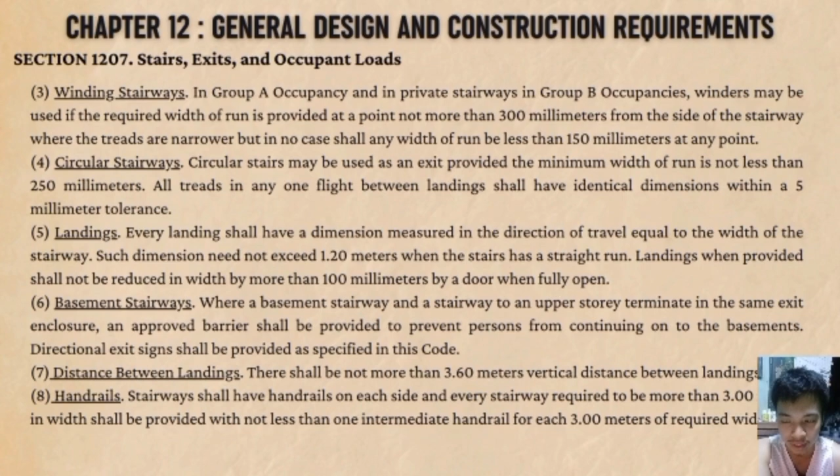And lastly, handrails. Stairways shall have handrails on each side, and every stairway required to be more than 3 meters in width shall be provided with not less than one intermediate handrail for each 3 meters of required width.

Exterior stairway protection. All openings in the exterior wall below, or within 3 meters measured horizontally of, an exterior exit stairway serving a building over 2 stories in height shall be protected by a self-closing fire assembly having a 3/4-hour fire-resistive rating, except that the openings may be unprotected when 2 separate exterior stairways serve an exterior exit balcony.

Stairway construction. Interior stairways shall be constructed as specified in this code.

Exterior stairways shall be of incombustible materials, except that type 3 buildings which do not exceed 2 stories in height, located in less fire-restrictive fire zones, as well as type 1 buildings, may be of wood not less than 50 millimeters in nominal thickness.

In every building 4 or more stories in height, 1 stairway shall extend to the roof unless the roof has a slope greater than 1 in 3.

Every required stairway shall have a headroom clearance of not less than 2 meters. Such clearance shall be established by measuring vertically from the plane parallel and tangent to the stairway tread nosing to the soffit above, at all points.

Ramps. A ramp conforming to the provisions of this code may be used as an exit. The width of ramps shall be as required for corridors. If conforming to the provisions of this code, a horizontal exit may be considered as the required exit.

All openings in a separation wall shall be protected by a fire assembly having a fire-resistive rating of not less than 1 hour. Every interior stairway, ramp, or escalator shall be enclosed as specified in this code, except that in other than Group D occupancies, an enclosure will not be required for a stairway, ramp, or escalator serving only one adjacent floor and not connected with corridors or stairways serving other floors.

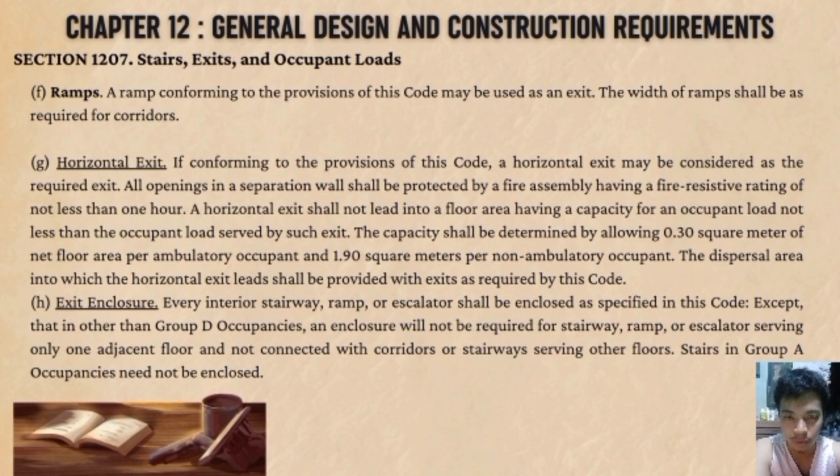Stairs in Group A occupancies need not be enclosed. Enclosure walls shall not be less than 2 hour fire-resistive construction. There shall be no openings into exit enclosures except exit doorways and openings in exterior walls. All exit doors in an exit enclosure shall be appropriately protected.

Stairway and ramp enclosures shall include landings and parts of the floors connecting stairway flights, and shall include a corridor on the ground floor leading from the stairway to the exterior of the building.

A stairway in an exit enclosure shall not continue below the grade level exit unless an approved barrier is provided at the ground floor level to prevent persons from accidentally continuing into the basement. There shall be no enclosed usable space under the stairways in an exit enclosure, nor shall the open space under such stairways be used for any purpose.

Smoke-proof enclosures. A smoke-proof enclosure shall consist of a vestibule and continuous stairways enclosed from the highest point to the lowest point by walls of 2 hour fire-resistive construction.

Stairs in a smoke-proof enclosure shall be of incombustible construction. There shall be no openings in a smoke-proof enclosure except exit doorways and openings in exterior walls. The opening from the building to the vestibule or balcony shall be protected with a self-closing fire assembly having a 1 hour fire-resistive rating. A smoke-proof enclosure shall exit into a public way or into an exit passageway leading to a public way.

Lastly, a stairway in a smoke-proof enclosure shall not continue below the grade level exit unless an approved barrier is provided at the ground floor level to prevent persons from accidentally walking into the basement.

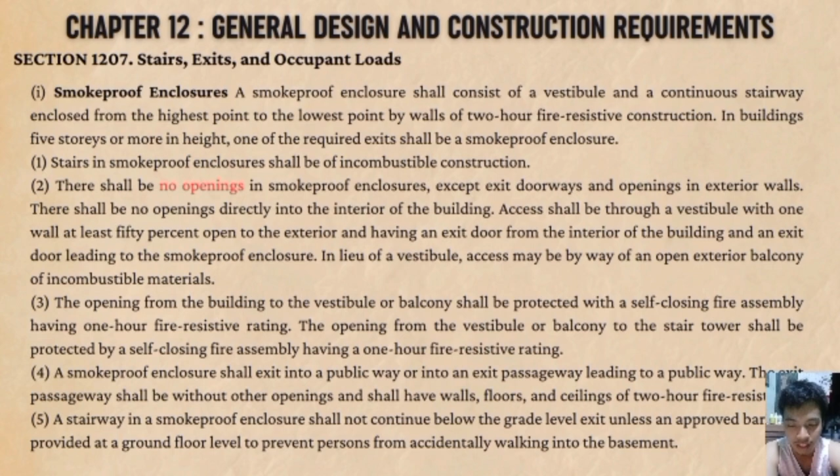Exit outlets, courts, and passageways. Every exit shall discharge into a public way, exit court, or exit passageway. Width: every exit court and exit passageway shall be at least as wide as the required total width of the tributary exits, such required width being based on the occupant load served.

The slope of exit courts shall not exceed 1 in 10. Every exit court shall be provided with exits as required in this code. All openings into an exit court less than 3 meters wide shall be protected by a fire assembly having not less than 3/4 hour fire-resistive rating.

Exit signs and illumination. Exits shall be illuminated at any time the building is occupied, with lights having an intensity of not less than 10.7 lux at floor level, except that for Group A occupancies, the exit illumination shall be provided with separate circuits or separate sources of power, but not necessarily separate from exit signs where these are required for exit sign illumination.

Aisles. Every portion of every building in which seats, tables, merchandise, equipment, or similar materials are installed shall be provided with aisles leading to an exit. Every aisle shall be not less than 800 millimeters wide if serving only one side, and not less than 1 meter wide if serving both sides.

In areas occupied by seats, and in Group H and I occupancies without seats, the line of travel to an exit door by an aisle shall be no more than 45 meters.

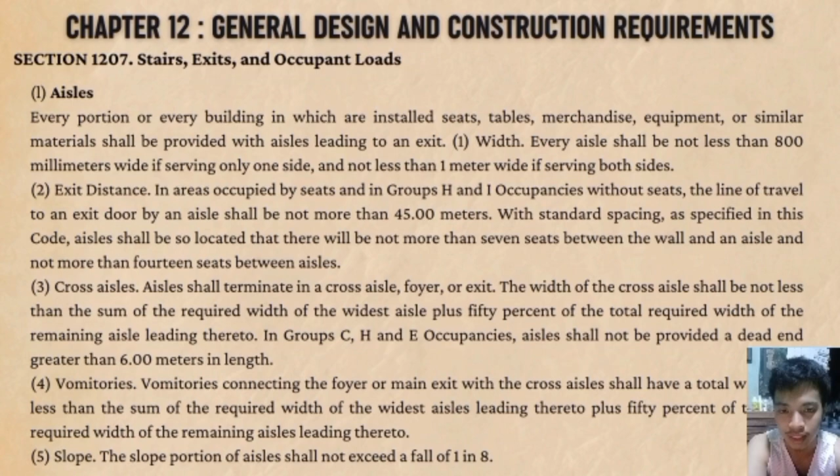Seats. With standard seating, the spacing of rows of seats from back to back shall not be less than 840 millimeters. With continental seating, the spacing of rows of unoccupied seats shall provide a clear width measured horizontally as follows: 450 millimeters clear for rows of 18 seats or less, 500 millimeters clear for rows of 35 seats or less, 525 millimeters clear for rows of 45 seats or less, and 550 millimeters clear for rows of 46 seats or more. The width of any seat shall be not less than 450 millimeters.

Reviewing stands, grandstands, and bleachers. Stands made by combustible framing shall be limited to 10 rows or 2.7 meters in height. The minimum unit load for reviewing stands, grandstands, and bleachers shall be 500 kilograms per square meter of horizontal projection for structure as a whole.

Spacing of seats. The minimum spacing of rows of seats measured from back to back shall be 600 millimeters for seats without backrest in open air stands, 750 millimeters for seats with backrest, and 850 millimeters for chair seating. There shall be a space of not less than 300 millimeters between the back of each seat and the front of the seat immediately behind it. The maximum rise from one row of seats to the next shall not exceed 400 millimeters.

Seating capacity. For determining the seating capacity of a stand, the width of any seat shall not be less than 450 millimeters nor more than 480 millimeters.

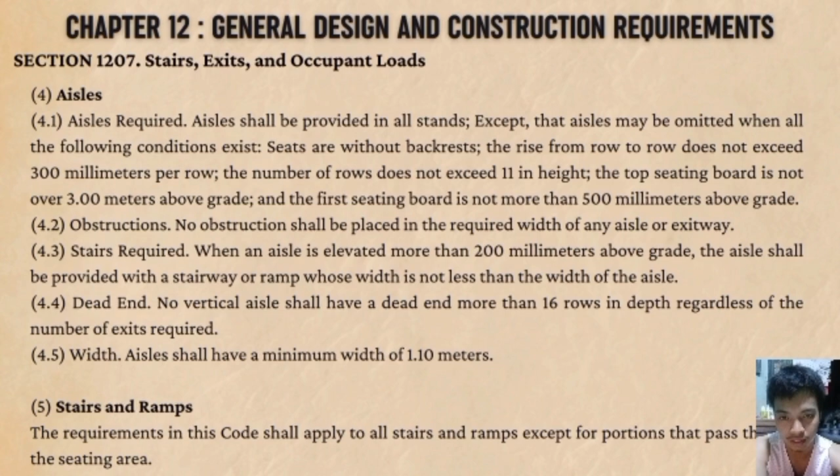Stairs and ramps. The requirements in this code shall apply to all stairs and ramps except for portions that pass through the seating area. Stair rise and run: the maximum rise of tread shall not exceed 200 millimeters and the minimum width of the run shall be 280 millimeters. A ramp with a slope exceeding 1 in 10 shall have a handrail.

Stairs for stands shall have handrails. Handrails shall conform to the requirements of this code.

Guardrails shall be required in all locations where the top of the seat plank is more than 1.2 meters above the grade, and at the front of the stand elevated more than 600 millimeters above grade.

Railing shall be 1.1 meters above the rear of the seat plank, or 1.5 meters above the rear of the steps in an aisle when the guardrail is parallel and adjacent to an aisle, except that the height may be reduced to 900 millimeters for guardrails located in front of the grandstand.

A mid-rail shall be placed adjacent to any seat to limit the open distance above the top part of the seat to 250 millimeters, where the seat is at the extreme end or at the extreme rear of the bleachers or grandstand. Footboards shall be provided for all rows of seats above the third row, or beginning at such a point where the seating plank is more than 600 millimeters above grade.

Exits. The line of travel to an exit shall not exceed 45 meters. For stands with seats without backrests, this distance may be measured by direct line from a seat to the exit from the stand. An aisle may be considered as only one exit unless it is continuous at both ends to a legal building exit or to a safe dispersal area.

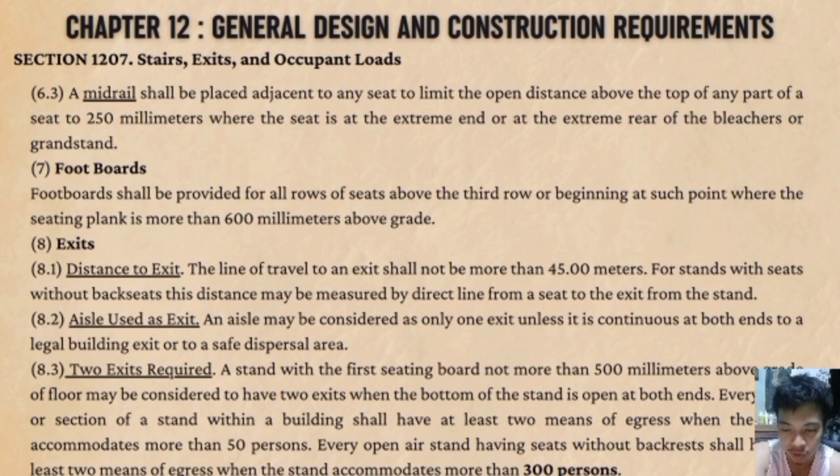A stand with first seating board not more than 500 millimeters above grade or floor may be considered to have two exits when the bottom of the stand is open at both ends. Every stand or section of a stand within a building shall have at least two means of egress when the stand accommodates more than 50 persons.

3 exits shall be required for stands within a building when there are more than 300 occupants within a stand, and for an open air stand with seats without backrest where a stand or section accommodates more than 1,000 occupants. 4 exits shall be required when a stand or section of a stand accommodates more than 1,000 occupants, except that for an open air stand with seats without backrest, 4 exits need not be provided unless there is accommodation for more than 3,000 occupants.

The total width of exits in meters shall not be less than the total occupant load served divided by 165, except that for open air stands with seats without backrest, the total width of exits in meters shall not be less than the total occupant load served divided by 500 when exiting by stairs, and divided by 650 when exiting by ramps or horizontally.

Securing of chairs: Chairs and benches used on raised stands shall be secured to the platforms upon which they are placed, except that when less than 25 chairs are used upon a single raised platform, the fastening of seats to the platform may be omitted. When more than 500 loose chairs are used in connection with athletic events, chairs shall be fastened together in groups of not less than 3 and shall be tied or staked to the ground.

Safe dispersal area: Each safe dispersal area shall have at least 2 exits. If more than 6,000 persons are to be accommodated within an area, there shall be a minimum of 3 exits. And for more than 9,000 persons, there shall be a minimum of 4 exits.

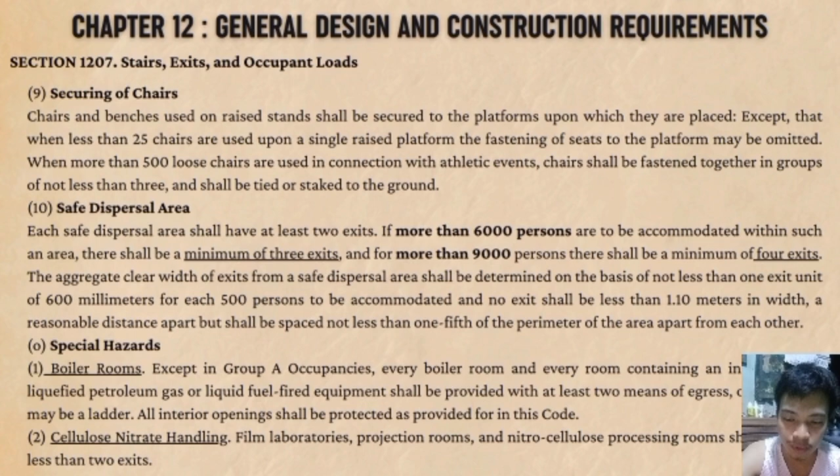Cellulose nitrate handling: Film laboratories, projection rooms, and nitrocellulose processing rooms shall have not less than 2 exits.

Section 1208, Skylights. All skylights shall be constructed with metal frames except those for groups A and J occupancies. Frames of skylights shall be designed to carry loads required for roofs. All skylights, the glass of which is set at an angle of less than 45 degrees from the horizontal, if located above the first story, should be set at least 100 millimeters above the roof.

Spacing between supports in one direction for flat wired glass in skylights shall not exceed 625 millimeters. Corrugated wired glass may have supports 1.5 meters apart in the direction of the corrugation. Skylights installed for use of photographers may be constructed of metal frames and plate glass without wire netting. Ordinary glass may be used in the roof and skylight for a greenhouse, provided that the height of the greenhouse at the ridge does not exceed 6 meters above grade.

Glass used for transmission of light, if placed in floors or sidewalks, shall be supported by metal or reinforced concrete frames, and such glass shall not be less than 12.5 millimeters in thickness. Any such glass over 100 square centimeters in area shall have wire mesh embedded in the same, or shall be provided with a wire screen underneath as specified for skylights in this code.

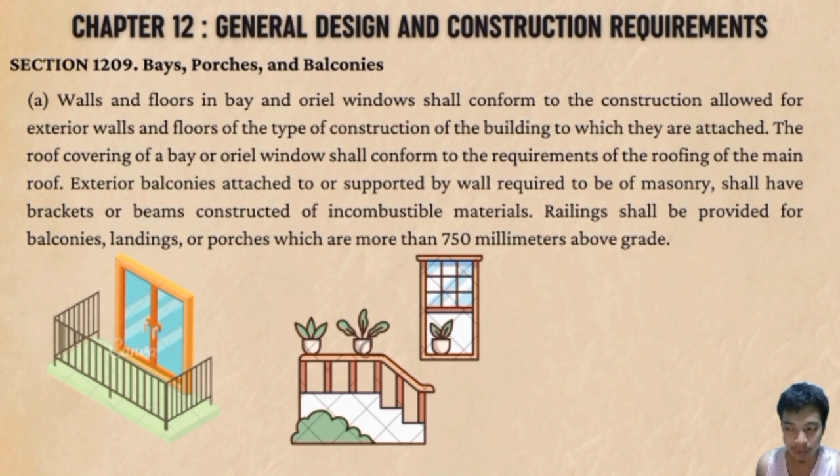Section 1209, Bays, Porches, and Balconies. Walls and floors in bay and oriel windows shall conform to the construction allowed for exterior walls and floors of the type of construction of the building to which they are attached. The roof covering of a bay or oriel window shall conform to the requirements of the roofing of the main roof. Exterior balconies attached to and or supported by a wall required to be of masonry shall have brackets or beams constructed of incombustible materials. Railings shall be provided for balconies, landings, or porches which are more than 750 millimeters above grade.

Section 1210, Penthouses and Roof Structures. No penthouse or other projection above the roof in a structure of other than Type 5 construction shall exceed 8.4 meters above the roof when used as an enclosure for tanks or for elevators which run to the roof, and in all other cases shall not extend more than 3.6 meters in height above the roof.

The aggregate area of all penthouses and other roof structures shall not exceed one-third of the area of the supporting roof. No penthouse, bulkhead, or any other similar projection above the roofs shall be used for purposes other than shelter or mechanical equipment or shelter of vertical shaft openings in a roof.

Roof structure shall be constructed with walls, floors, and roof as required for the main portion of the building, except in the following cases: On Type 3 and 4 construction, the exterior walls and roof of penthouses which are 1.5 meters or more from an adjacent property line may be one-hour fire-resistive incombustible construction. Walls not less than 1.5 meters from an exterior wall of Type 4 construction may be one-hour fire-resistive incombustible construction. The above restriction shall not prohibit the placing of wood flagpoles or similar structures on the roof of any building.

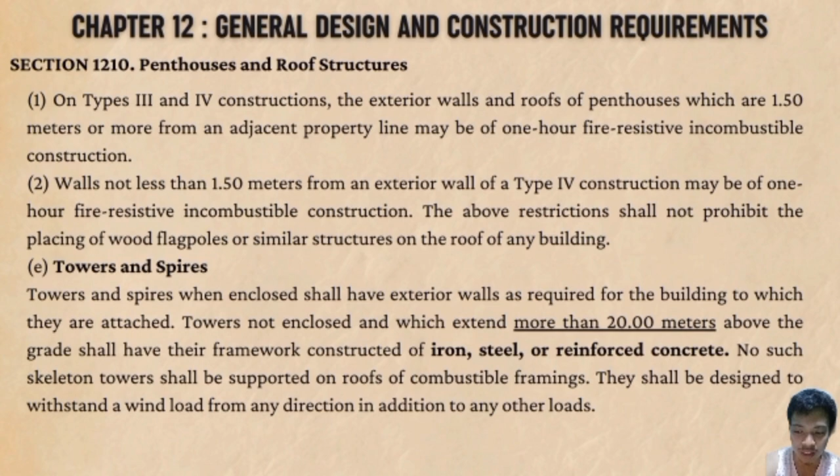Towers and spires, when enclosed, shall have exterior walls as required for the building to which they are attached. Towers that are not enclosed and which extend more than 20 meters above grade shall have their framework constructed of iron, steel, or reinforced concrete. No such skeleton towers shall be supported on roofs of combustible framing. They shall be designed to withstand a wind load from any direction, in addition to any other loads.

Section 1211, Chimneys, Fireplaces, and Barbecues. Chimneys shall be designed, anchored, supported, reinforced, constructed, and installed in accordance with generally accepted principles of engineering. Every masonry chimney shall have walls of masonry units, bricks, stones, listed masonry chimney units, reinforced concrete, or equivalent solid thickness of hollow masonry, and lined with suitable liners in accordance with the following requirements.

Masonry chimney for residential type appliances. Masonry chimney shall be constructed of masonry units or reinforced concrete with walls not less than 100 millimeters thick, or of durable stone masonry not less than 300 millimeters thick.

Masonry chimney for low heat appliances. Masonry chimney shall be constructed of masonry units or reinforced concrete with walls not less than 200 millimeters thick, except that rubble stone masonry shall be not less than 300 millimeters thick. The chimney liner shall be in accordance with this code, the same as the other masonry chimneys.

Masonry chimney for medium heat appliances. Masonry chimney for medium heat appliances shall be constructed of solid masonry units or reinforced concrete not less than 200 millimeters thick, except that stone masonry shall be not less than 300 millimeters thick, and in addition shall be lined with not less than 100 millimeters of fire brick laid in a solid bed of fire clay mortar with solidly filled head, bed, and wall joints, starting not less than 600 millimeters below the chimney connector entrance.

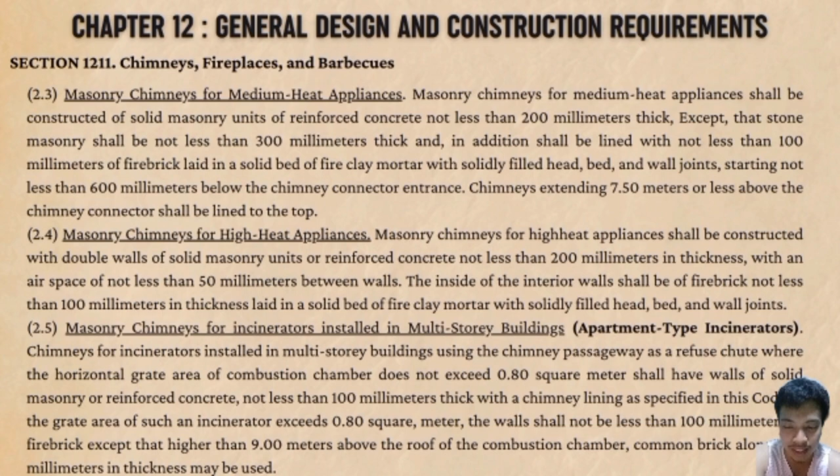Masonry chimneys for commercial and industrial type incinerators. Masonry chimney for commercial and industrial type incinerators of a size designed for not more than 110 kilograms of refuse per hour, and having a horizontal grate area not exceeding 0.5 square meter, shall have a wall of solid masonry or reinforced concrete not less than 100 millimeters thick, with lining of not less than 100 millimeters of fire brick, which lining shall extend for not less than 1.2 meters above the roof of the combustion chamber.

Linings. Fire clay chimney lining shall not be less than 15 millimeters thick. No chimney passageway shall be smaller in area than the vent connection of the appliance attached thereto. Every masonry chimney shall extend at least 600 millimeters above the part of the roof through which it passes, and at least 600 millimeters above the highest elevation of any part of the building within 3 meters of the chimney.

No masonry chimney shall be corbelled from a wall more than 150 millimeters, nor shall a masonry chimney be corbelled from a wall which is less than 300 millimeters in thickness, unless it projects equally on each side of the wall. In the second story of a two-story building of Group A occupancy, corbelling of masonry chimney on the exterior of the enclosing walls may equal the wall thickness.

No change in the size or shape of a masonry chimney shall be made within a distance of 150 millimeters above or below the roof joists or rafters where the chimney passes through the roof. When more than one passageway is contained in the same chimney, a masonry separation at least 100 millimeters thick, bonded into the masonry wall of the chimney, shall be provided between the two separate passageways.

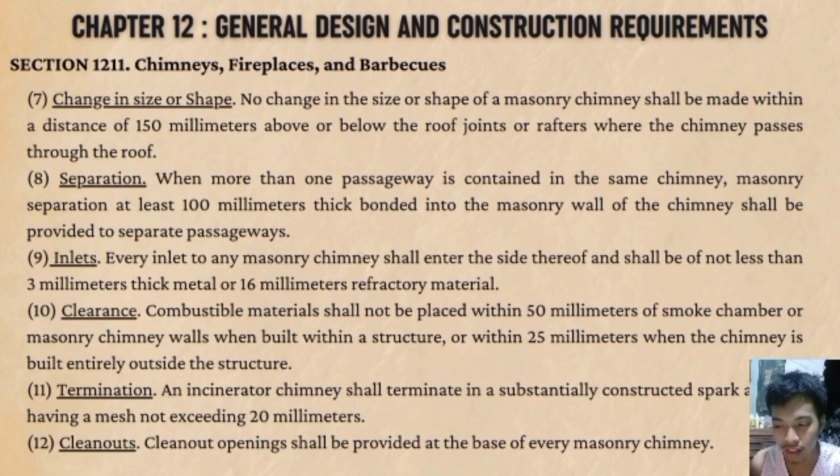An incinerator chimney shall terminate in a substantially constructed spark arrestor having a mesh not exceeding 20 millimeters, and a clean-out opening shall be provided at the base of every masonry chimney.

Fireplaces and barbecues. Fireplaces, barbecues, smoke chambers, and fireplace chimneys shall be in solid masonry or reinforced concrete and shall conform to the minimum requirements specified in this code.

Walls of fireplaces shall not be less than 200 millimeters in thickness. Walls of the firebox shall not be less than 250 millimeters in thickness, except that when a lining of fire brick is used, such walls shall not be less than 200 millimeters in thickness.

For hoods, metal hoods used as part of the fireplace or barbecue shall not be less than number 18 gauge copper, galvanized iron, or other equivalent corrosion-resistant ferrous metal, with all seams and connections of smoke-proof unsoldered construction.

Circulators. Approved metal heat circulators may be installed in fireplaces. Front and side walls shall not be less than 200 millimeters in thickness. Walls of chimneys without flue lining shall not be less than 200 millimeters in thickness.

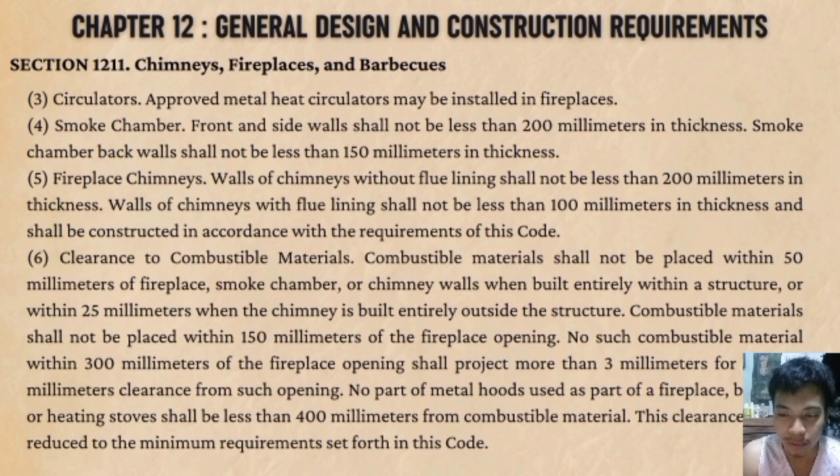Clearance to combustible materials. Combustible materials shall not be placed within 50 millimeters of fireplace, smoke chamber, or chimney walls when built entirely within a structure, or within 25 millimeters when the chimney is built entirely outside the structure.

The net cross-sectional area of the flue and of the throat between the firebox and the smoke chamber of a fireplace shall not be less than the requirements to be set forth by the Secretary. Masonry over the fireplace opening shall be supported by a non-combustible lintel.

Every fireplace shall be provided with a brick, concrete, stone, or other approved non-combustible hearth slab at least 300 millimeters wider on each side than the fireplace opening and projecting at least 450 millimeters therefrom.

Section 1212, Fire Extinguishing System. Fire extinguishing systems, where required, A standard automatic fire extinguishing system shall be installed in the following places and in the manner provided in this code.

In every story, basement, or cellar with an area of 200 square meters or more, which is used for habitation, recreation, dining, study, or work, and which has an occupant load of more than 20.

In all dressing rooms, rehearsal rooms, workshops, or factories, and other rooms with an occupant load of more than 10, or assembly halls under Group H and I occupancies with an occupant load of more than 500, and if the exit doors of said rooms are more than 30 meters from the nearest safe fire dispersal area of the building or opening to an exit court or street.

And lastly, in all rooms used for storage or handling of photographic, X-ray, nitrocellulose films, and other inflammable articles.

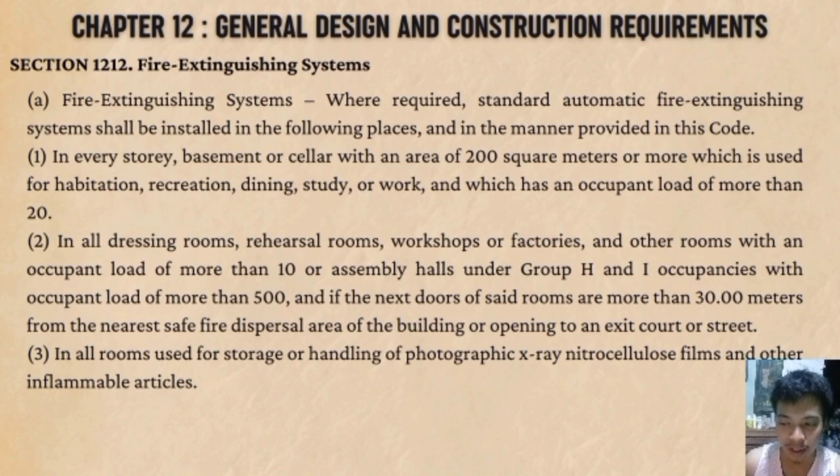Dry standpipes. Every building 4 or more stories in height shall be equipped with 1 or more dry standpipes.

Construction and test. Dry standpipes shall be of wrought iron or galvanized steel, and together with fittings and connections shall be of sufficient strength to withstand 20 kilograms per square centimeter of water pressure when ready for service without leaking at the joints, bulbs, or fittings.

For size, dry standpipes shall be of such size to be capable of delivering 900 liters of water per minute from each of any 3 outlets simultaneously under the pressure created by one fire engine or pumper based on the standard equipment available.

Number required: every building 4 or more stories in height where the area of any floor above the third floor is 950 square meters or less shall be equipped with at least one dry standpipe, and an additional standpipe shall be installed for each additional 950 square meters or fraction thereof.

Location. Standpipes shall be located within enclosed stairway landings or near such stairways as possible, or immediately inside of an exterior wall, and within 300 millimeters of an opening in a stairway enclosure of the balcony or vestibule of a smoke-proof tower or an outside exit stairway.

Siamese connection. Subject to the provision of subparagraph 2, all 100 millimeter dry standpipes shall be equipped with a two-way Siamese fire department connection. All 125 millimeter dry standpipes shall be equipped with a three-way Siamese fire department connection, and 150 millimeter dry standpipes shall be equipped with a four-way Siamese fire department connection.

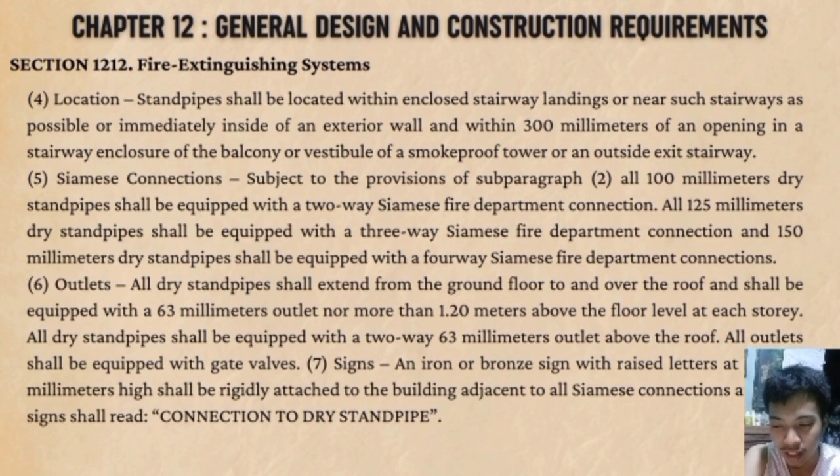All standpipes shall extend from the ground floor to and over the roof, and shall be equipped with a 63 millimeters outlet no more than 1.2 meters above the floor level at each story. An iron or bronze sign with raised letters at least 25 millimeters high shall be rigidly attached to the building adjacent to all Siamese connections, and such signs shall read, 'Connection to dry standpipe.'

Section 1213, Stages and Platforms. Stage ventilators: there shall be one or more ventilators constructed of metal or other incombustible material near the center and above the highest part of any working stage, raised above the stage roof, and having a total ventilation area equal to at least 5% of the floor area within the stage walls.

Opening action. Ventilators shall open by spring action or force of gravity sufficient to overcome the effects of neglect, rust, dirt, or expansion by heat or warping of the framework.

Glass, if used in ventilators, must be protected against falling on a stage. A wire screen, if used under the glass, must be so placed that if clogged, it cannot reduce the required ventilating area or interfere with the operating mechanism or obstruct the distribution of water from the automatic fire extinguishing systems.

Ventilators, penthouses, and supporting framework shall be designed in accordance to this code. Springs, when employed to actuate ventilator doors, shall be capable of maintaining full required tension indefinitely.

Location of fusible links. A fusible link shall be placed in a cable control system on the underside of the ventilator at or above the roof line or as approved by the building official, and shall be so located as not to be affected by the operation of the fire extinguishing system.

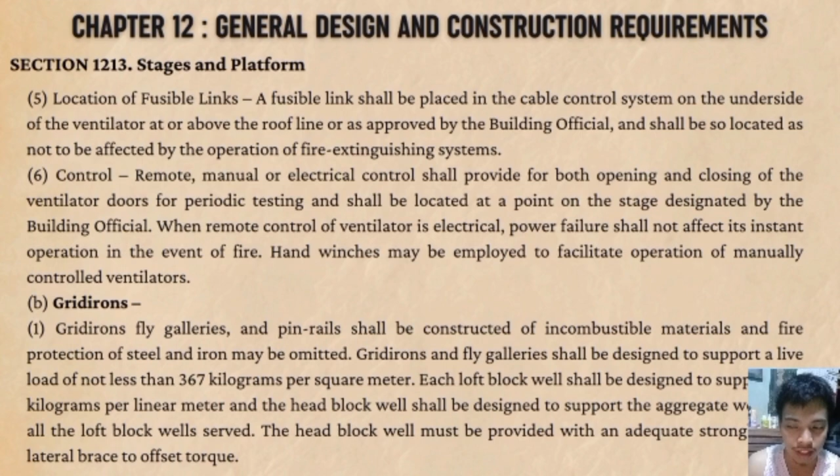Gridirons. Gridirons, fly galleries, and pin rails shall be constructed of incombustible materials, and fire protection of steel and iron may be omitted. Gridirons and fly galleries shall be designed to support a live load of not less than 367 kilograms per square meter. The main counterweight sheave beam shall be designed to support a horizontal and vertical uniformly distributed live load sufficient to accommodate the weight imposed by the total number of loft blocks in the gridirons.

In a building having a stage, the dressing room section, workshop, and storeroom should be located on the stage side of the proscenium wall and shall be separated from each other and from the stage by not less than 1 hour fire resistive occupancy separation.

A stage shall be completely separated from the auditorium by a proscenium wall of not less than 2 hour incombustible construction.

Stage floor: the type of construction for stage floor shall depend on the requirements based on the type of occupancy and the corresponding fire resistive requirements. For platforms, the type of construction shall depend upon the requirements based on the type of occupancy and the corresponding fire resistive requirements.

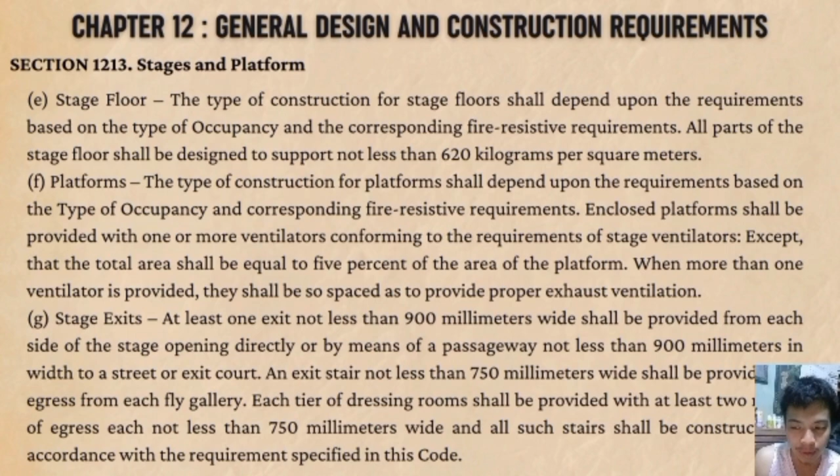For stage exits, at least one exit not less than 900 mm wide shall be provided from each side of the stage opening, directly or by other means of passageway not less than 900 mm in width, to a street or exit court. Section 1214, Motion Picture Projection Rooms, General Requirements.

The provisions of this section shall apply only when ribbon-type motion picture films in excess of 22 mm width and electric projection equipment are used.

Every motion picture machine using ribbon-type film in excess of 22 mm width and electric arc projection equipment, together with all electrical devices, rheostats, machines, and all such films present in any group C, I, or H occupancy shall be enclosed in a projection room large enough to permit the operator to walk freely on either side and back of the machine.

For construction, every projection room shall be of not less than 1 hour fire-resistive construction throughout, and the walls and ceiling shall be finished with incombustible materials.

Every projection room shall have at least 2 doorways separated by not less than 1/3 the perimeter of the room, each at least 750 mm wide and 2 meters high.

Ports and openings in projection room walls shall be of 3 kinds: projection ports, observation ports, and combination ports used for both observation and for stereopticon, spot, or floodlight machines.

Ports required: there shall be provided for each motion picture projector not more than one projection port, which shall be limited to an area of 750 square centimeters, and not more than one observation port, which shall be limited in area to 1,300 square centimeters.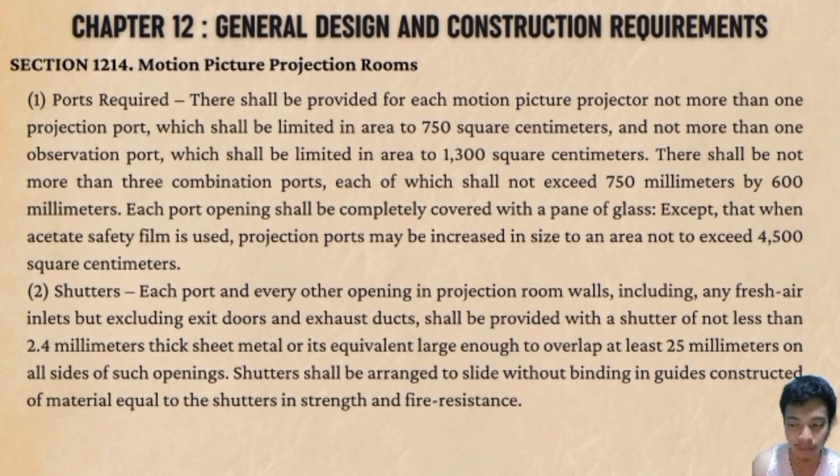There shall be not more than 3 combination ports, each of which shall not exceed 750 mm by 600 mm. Each port and every other opening in projection room walls, including any fresh air inlets but excluding exit doors and exhaust ducts, shall be provided with a shutter of not less than 2.4 mm thick sheet metal or its equivalent, large enough to overlap at least 25 mm on all sides of such openings.

For ventilation inlet, a fresh air inlet from the exterior of the building not less than 900 square centimeters and protected with wire netting shall be installed within 50 millimeters of the floor in every projection room, the source of which shall be remote from other outside vents or flues. For outlets, ventilation shall be provided by one or more mechanical exhaust systems which shall be drawing air from each arc lamp housing to outdoors, either directly or through an incombustible flue used for no other purposes.

Regulation of equipments. All shelves, fixtures, and fixed equipments in a projection room shall be constructed of incombustible materials. All films not in actual use shall be stored in metal cabinets having individual compartments for reels, or shall be in generally accepted shipping containers. No solder shall be used in construction of such cabinets.

Section 1215, Lathing, plastering, and installation of wallboards. The installation of lath, plaster, and gypsum wall boards shall conform to the fire resistive rating requirements and the type of construction of building.

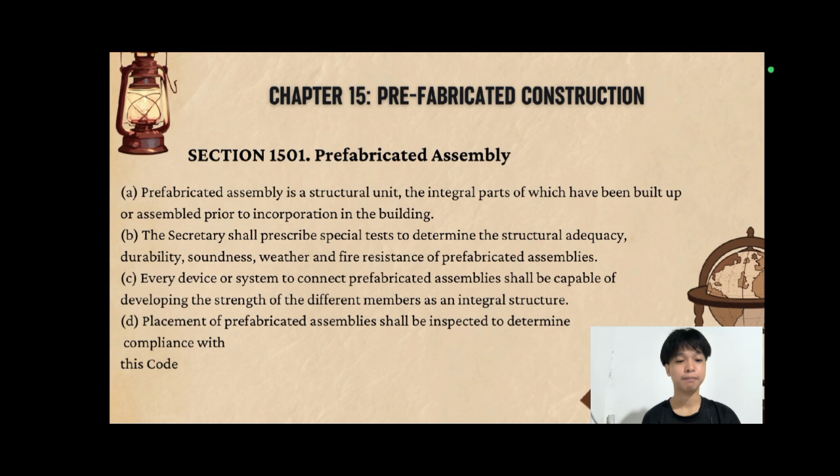Letter D. Ang pagkakabit ng prefabricated assemblies ay dapat suriin upang matiyak na sumusunod ito sa mga alituntunin. Layunin ng pagsusuring ito na matiyak na maayos at tama ang pagkakabit ng mga prefabricated assemblies na bahagi ng gusali para sa kaligtasan at katatagan ng structure.

Magtungo naman tayo sa Chapter 16. Plastics. Section 1601 o Approved Plastics. Ito ay nagtatakda ng pamantayan para sa mga plastic materials na itinuturing na ligtas na gamitin sa mga sitwasyon kung saan magkaroon ng apoy. Ayon sa section na ito, ang mga plastic na approved ay dapat magkakaroon ng tiyak na mga katangian upang matiyak ang kaligtasan ng mga ito sa usaping pangkaligtasan sa sunog.

Section 1602. Installation. Letter A. Structural requirement. Dapat ang lahat ng plastic na materyales ay may sapat na lakas at tibay upang makatiis sa mga itinakdang disenyo at bigat. Kailangan magbigay ng sapat at concrete na impormasyon tungkol sa mga stress, pinakamahabang hindi suportang distansya o not supported distance at iba pang impormasyon na kinakailangan para sa iba't ibang kapal at anyo ng plastics.

Pagkakabit. Ang mga pagkakabit ay dapat sapat upang makatiis ng mga itinakdang bigat at sa mga internal at external stress na hinihingi ng kabuuan. Dapat din isaalang-alang ang tamang pag-ayon ng plastic sa iba pang materyales na kasama nito sa pagkabuo. Sa Section 1603 o Glazing of Opening, dito naman tinatalakay ang mga patakaran ukol sa mga paglalagay ng salamin

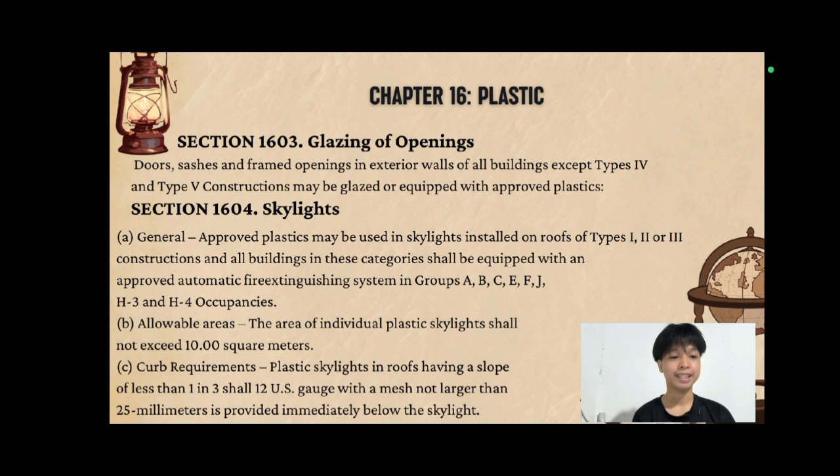Sa Section 1605 o Light Transmitting Panels in Monitor and Sawtooth Roof, dito naman tinatalakay ang paggamit ng light transmitting panel sa mga monitor at sawtooth roof.

In general, hindi kinakailangan ng fire resistive rating ang bubong at sa mga gusaling may otomatikong sistema ng pag-apula ng apoy. Pinapayagan ang paggamit ng approved plastic bilang light transmitting medium. Gayunpaman, para sa Type 2 construction, ang mga plastic na ginagamit ay dapat may tamang katangian laban sa pagkalat ng apoy. Letter B. Ang plastic glazing sa monitor at sawtooth roof ay hindi dapat lumampas sa 15 square meters.

Ang kabuuang area ng plastic sa skylights, monitor, sawtooth roof glazing ay hindi dapat higit sa 20% ng floor area ng silid. Ang mga plastic panel ay dapat nakahiwalay sa isa't isa gamit ang hindi madaling masunog na material, o bahagi ng roofing material na hindi bababa sa 1.5 meters ang haba. Dapat din na ang ibabang bahagi ng plastic ay nasa 150 mm ang taas mula sa katabing bubong.

Sa Section 1606 naman o Plastic Light Diffuser in Ceilings. Ang mga diffuser ng ilaw sa kisame na may sukat na higit sa 10% ng anumang 10 square meters na lugar ng silid ay dapat gawa sa mga aprobadong plastic na tumutugon sa mga kinakailangan na nakasaad sa code na ito. Sa Section 1607 naman o partitions, kung ang partition ay hindi kinakailangan maging fire resistive o di nasusunog na construction, ang mga aprobadong plastic na tumutugon sa mga kinakailangan na nakasaad sa code na ito ay maaaring gamitin.

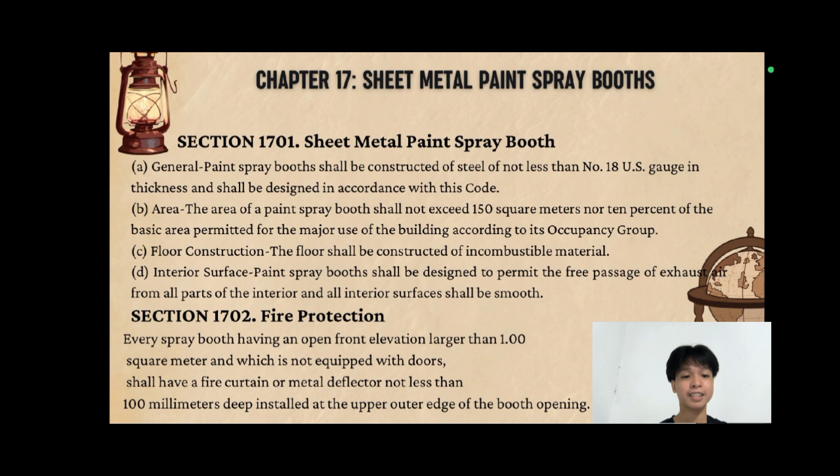Section 1703 o Light. Tungkol sa light ay may kinalaman sa kung paano dapat iilaw ang mga spray booths. Ito yung lugar kung saan nagpipintura gamit ang spray. Dapat ang mga ilaw sa paint spray booths ay dumadaan sa mga panel na gawa sa hammered wire o with treated glass na may matibay at hindi madaling mabasag.

Tinakda rin dito na ang mga glass panel na ito ay ilalagay sa posisyong makakaiwas sa posibleng pagsiklab ng apoy o pagkasunog dulot ng naipong spray paint. Section 1704 naman, dito naman tungkol ito sa ventilation at may kinalaman sa mga kinakailangan para sa maayos at ligtas na ventilasyon sa paint spray booths.

In general, dapat magkaroon ng mechanical ventilation o ventilasyong pinapatakbo ng makina na direktang naglalabas ng hangin palabas ng gusali. Ang exhaust system na ito ay dapat dinisenyo upang maipatakbo ang hangin sa paint spray areas sa bilis na hindi bababa sa 30 meters per minute.

Ang mga blade o talim ng exhaust fan ay kailangang gawa sa non-ferrous material o materyales na hindi madaling kalawangin, at dapat nakaposisyon ito nakadikit sa exhaust duct upang maiwasan ang pinsala o panganib.

Exhaust ducts. Ang mga exhaust duct naman, ito yung naglalabas ng hangin mula sa paint spray booth, ay kailangan gawa sa bakal na may tamang kapal ayon sa itinakda ng secretary or namamahalang opisyal. Dapat din nakaposisyon ang mga discharge point ng ducts ng spray booth na hindi bababa sa 2 meters mula sa anumang madaling mag-apoy na bahagi ng gusali at hindi bababa sa 8 meters mula sa mga bintana o butas sa mga kalapit na pader.

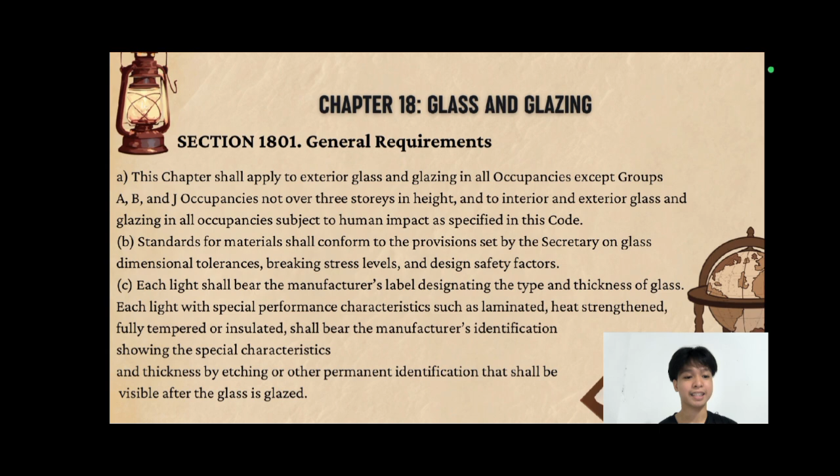kabilang ang mga sukat, tibay sa pagkabasag at mga disenyo na nakabase sa kaligtasan. Ang bawat piraso ng salamin ay dapat may tatak mula sa manufacturer na nagpapakita ng uri at kapal ng salamin. Kung ang salamin ay may espesyal na katangian gaya ng pagiging laminated, heat strengthened, fully tempered o insulated, kailangan ito magkaroon ng permanenteng marka na nagpapakita ng espesipikong katangian at kapal ng salamin. At dapat ito ay nakikita kahit ang salamin ay naka-install na.

Ang Section 1802 naman, ito ay tungkol sa mga area limitation ng mga salamin sa panlabas ng gusali. Ang mga panlabas na salamin at glazing ay kailangan kayang tiisin ang pwersa ng hangin, depende sa taas ng bahagi ng gusali kung saan ito naka-install. Ang pwersang ito ay maaaring tumulak papasok o palabas, kailangan tiyakin na hindi madaling mabasag o masira ang salamin dahil sa lakas ng hangin.

Section 1803 naman. Ito ay tumutukoy sa mga kinakailangan para sa pag-install ng salamin sa mga lugar na sinusuportahan ng 4 na gilid. Ang mga salamin na ganito, ang suporta ay kailangan lagyan ng glazing na may tamang overlap ng salamin sa frame at tamang edge clearance, ito ay ang pagitan ng gilid ng salamin sa frame na naayon sa tinakda sa Section 1801. Kapag ang salamin naman ay naka-install sa mga fixed opening o hindi nagagalaw o permanenteng mga space, ang edge clearance dapat ay hindi bababa sa

edge clearance dapat ay hindi dapat bababa sa kailangan para makayanan ang mga pwersang dulot ng hangin at lindol upang maiwasang mabasag o masira ang salamin.

Sa Section 1804 naman, ito ay nagtatakda ng mga kinakailangan para sa louvered windows o bintanang may mga jalousie o louver na slats. Ang mga salamin na ginagamit sa ganitong uri ng bintana tulad ng regular plates, sheet glass, pattern glass ay hindi dapat mas manipis sa 5.6 mm. Ang haba ng bawat piraso ng salamin ay hindi rin dapat lumampas sa 1.20 meters upang maiwasan ang pagbasag o pagkasira.

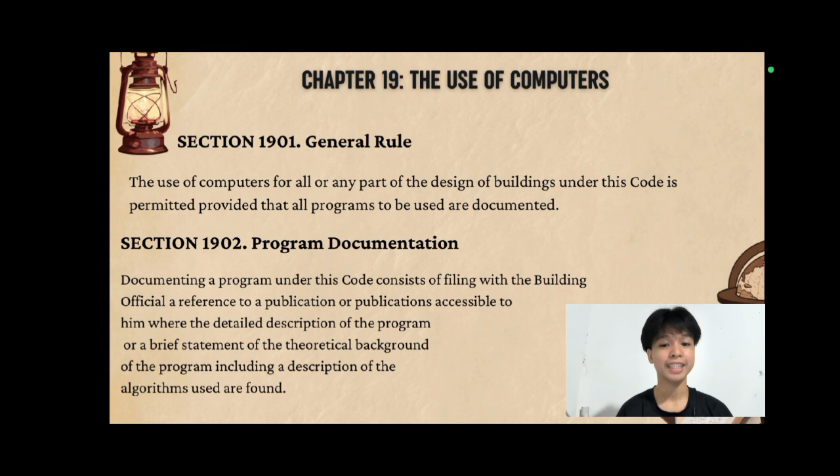Section 1902, Program Documentation. Kinakailangan na ang dokumentasyon ng isang programa ay may kasamang mga dokumento o sanggunian o reference na naglalaman ng detalyadong paglalarawan ng program, kabilang ang paliwanag sa mga teoryang ginamit at mga algorithm na nagpapatakbo nito. Ang mga dokumentong ito ay kailangan isumite sa mga building official upang masuri at maintindihan kung paano gumagana ang mga program. Layunin nito na magkaroon ng transparent na pagdodokumento ng mga proseso at technical na aspeto ng programang ginamit sa mga proyektong may kaugnayan sa construction o iba pang mga aplikasyon sa ilalim ng building code.

Sa Section 1903 naman, ang Submission of Computer-Generated Computation. Ito ay nangangailangan na ang mga output sheet o resulta ng mga kalkulasyong ginawa ng isang computer ay dapat isama sa kabuuang dokumento ng design. Ang mga output sheet na ito ay kailangan may nakalakip na certificate mula sa designer o consultant na nagpapatunay na

ang mga resulta ay mula sa mga programang may tamang dokumentasyon. Dapat din tukuyin sa certificate kung aling particular na programa ang ginamit para sa bawat bahagi ng mga kalkulasyong ipinakita. Layunin nito na masiguro ang transparency at tamang pagsunod sa mga pamantayan ng design.

Chapter 20, Sign. Sa Section 2001, General Requirement para sa mga sign o signboard ay may dalang pangunahing patakaran. Letter A. Hindi dapat magtayo ng anumang sign o signboard na maaaring magdulot ng kalituhan o humara sa tamang pagkakita o pagkaintindi ng mga opisyal na traffic sign, signal o device. Ibig sabihin, hindi dapat nakagulo o makaapekto ang mga signboard sa pag-unawa ng mga tao sa mga official sign na palatandaan sa daan. Letter B.

Hindi rin dapat magtayo ng anumang sign o signboard na makaharang sa mga natural tanawin o mga pinupuntahang lugar na pwedeng maka-distract o makagulo sa pagtingin ng publiko, na maaaring magdulot ng panganib sa trapiko o makakasira sa mga estetiko at kultura, halaga at tradisyon.